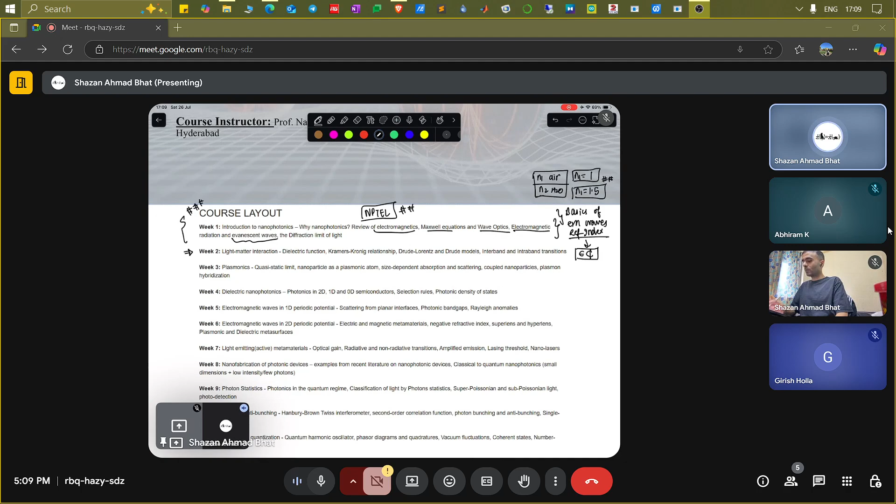That's what is going to be covered in week one. The professor has tried his best to cover those concepts in week one. We will try to brush up on it here in this session.

In week two, we will be dealing mostly with light-matter interaction. What is this light-matter interaction? It's basically the fundamental reason of what happens at the atomic scale, but this is just the classical interpretation, or what you call semi-classical. Semi-classical means you are treating the photons as electromagnetic waves, but treating the entire material as a group of atoms. That is what semi-classical basically means.

Let's give an example of what week two will deal with: the light-matter interaction part. You will come to know what happens when, for example, this is a material, let's say crystalline silicon, with a well-arranged structure of atoms inside it. If you shine a light, say a laser or some other light source, onto the silicon, what happens at the atomic scale? That is covered in this light-matter interaction part.

Why do I say this is semi-classical? If you have incoming light and material with atoms inside it, and you treat the light as an electromagnetic wave and the atoms as atoms, that is a semi-classical model or theory. But if you treat the atoms as such while treating light as photons, and compute how the photon interacts with single atoms, that case is the quantum case.

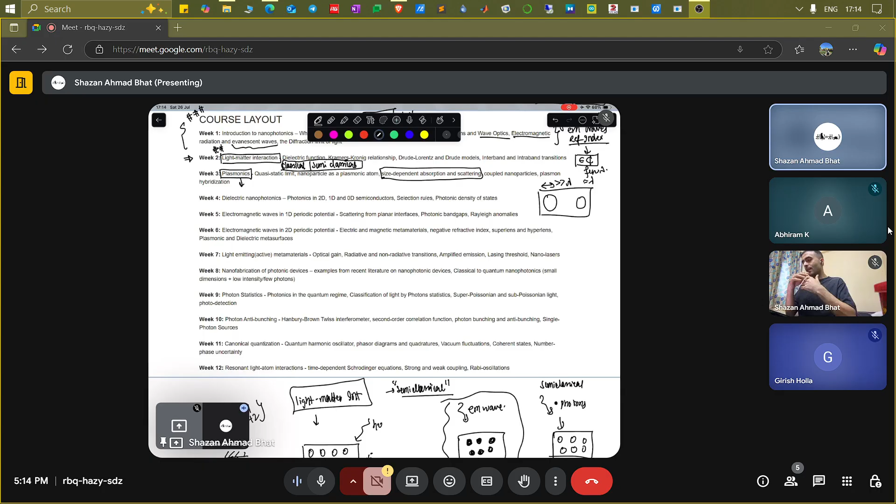Plasmonics is basically like collective excitation of the electrons. This is something called plasmons. For example, if you have a metal, you know that in a metal there are free electrons on the surface, a lot of free electrons. That's why it's highly conducting.

But what happens if you just shine light over the metal? It turns out that at a certain frequency, it's just like the resonance phenomena you have studied - the light resonates with the free electrons present on the metal. At that certain frequency, all these electrons in the metal couple to the light in such a way that it behaves like a single wave getting modulated inside the metal, like a wave in the metal. That is called collective excitation of electrons, also called plasma or plasmons - these are just fancy names, you don't need to worry about them.

Starting from earlier, we know about fermions and bosons. What is included in fermions? Electron is a fermion - particles having half integer spin. You don't need to worry about these things; if you know it that's fine, but if you don't know fermion or boson, that's absolutely fine too. But at least you know about electron, you know about photon - photon is a boson. And you have photon, phonon, and other bosons. These are something called quasi particles.

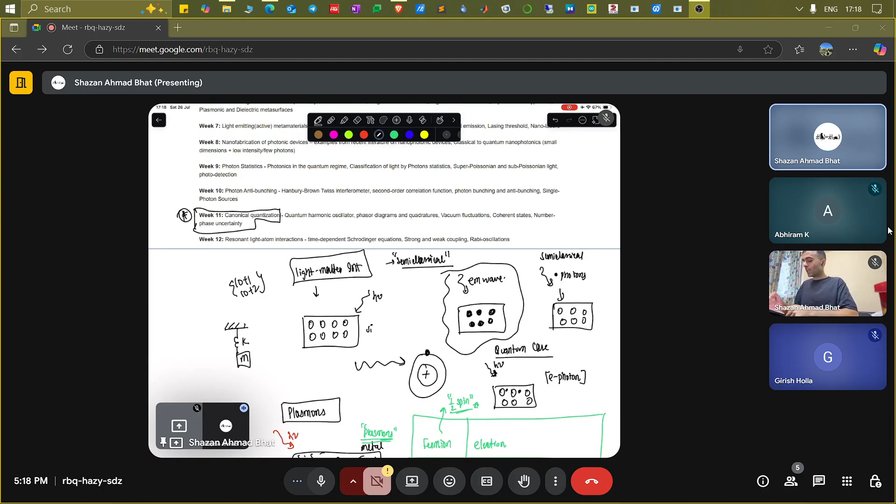In the final session of this, in week 11, you are going to study canonical quantization. If you have a continuous electromagnetic wave, for example this is the electric field, this is the magnetic field, the H field, and this is the direction of propagation of the wave. So what happens is if you quantize this thing, how do you quantize?

That's a different story. It's not just like you have a continuous signal and you take some discretized units and you get a discretized form of the wave. It's not as simple as that. Maybe you can understand it in that fashion, but it's not what exactly quantization means. If you quantize it, you get a particle picture, which is basically a photon.

So this is something called second quantization. The similar thing happens if you deal with any of the continuous fields. You have the electromagnetic field, which basically transmits electromagnetic energy.

You have, for example, the acoustic field. Acoustic field is like the acoustic wave. For example, I'm talking right now, so I am just vibrating the atoms in the air. But it's a continuous medium, the air is filled with molecules, filled with atoms, so it's a continuous medium filled with certain atoms.

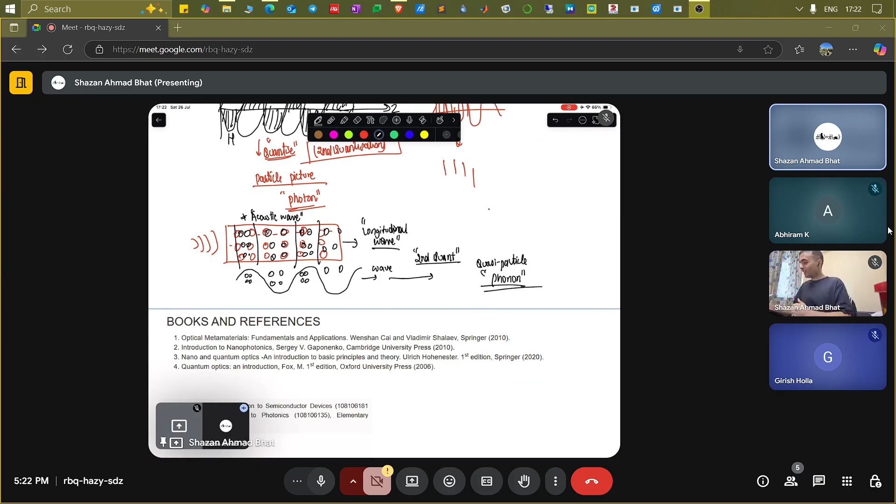And there are a lot of other quasi particles with names ending in 'on' - just like photon, phonon, maybe plasmon, magnon, polariton, and maybe polaron, all sorts of other stuff. You can just Google and you will find other quasi particles there. But what are these, basically? These are continuous fields, fields which are propagating energies between two interacting actual particles. When I talk about particles, I mean things like electrons, protons, neutrons - these are the actual particles. But these other things are the fields.

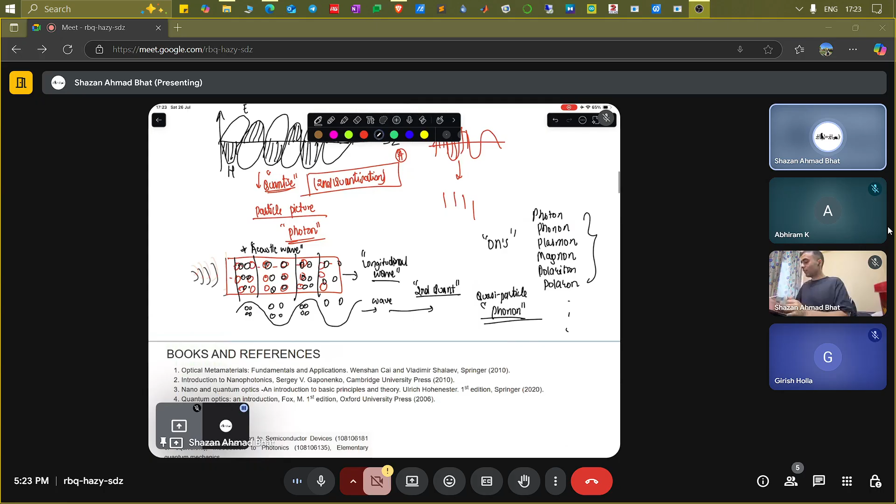That is a similar notion in, for example, if you talk about a magnon. What is a magnon? Maybe you might get worried about these names, but these are just fancy names. The concept can be simplified in terms of basic entities you know. Just like the photon is the quantized version of the electromagnetic wave.

The phonon is the quantized version of the acoustic wave, and phonons are present inside semiconductors because atoms can vibrate. If you quantize that vibration, you get a phonon. Similarly, plasmon: if you have continuous oscillations of the free electrons in a metal, that continuous free oscillation can be quantized using second quantization and you get a plasmon.

Similarly, magnons arise if you have certain magnetic materials, say a ferromagnetic material. The specific property of these materials is that they have domains where the spins have certain alignment. This is related to the spin of the electron, which can be either up-spin or down-spin. So what is spin?

We don't want to go into the philosophical or theoretical aspect of it, we just know about the spin of the electron. There are certain domains inside this ferromagnetic system where, say, all the spins are up-spin.

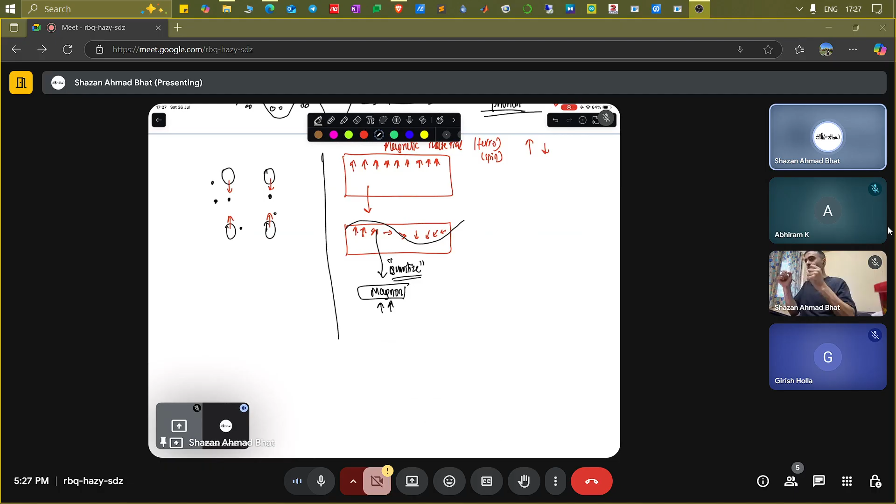When I say couple, I mean, for example, if you have a system with an atom and electrons here, you know atoms can vibrate. If this atom comes closer to another atom, what happens to the energies of the electron? They are going to change, because the electron's energy also depends on how close or how far the atoms are.

And where does this picture come from? It comes from your basic semiconductor physics, where we are always taught about crystalline systems with long range order of atoms. For example, in a semiconducting material the atoms are arranged in a well-ordered fashion.

Now if you take one atom, you know it has a positive nucleus surrounded by electrons, classically. Electrostatically, you have a positive charge and an electron, and you know how to draw the potential energy profile for such a system.

If you have a positive charge and an electron coming towards it, your potential energy profile will look something like this, plotted as potential energy versus x. So this is the potential energy profile of a single atom.

Let's consider, for example, a hydrogen atom - how does the potential energy profile look like if you have a single positive charge and an electron coming from infinity? As per the definition of potential energy, you will have a potential energy profile something like this.

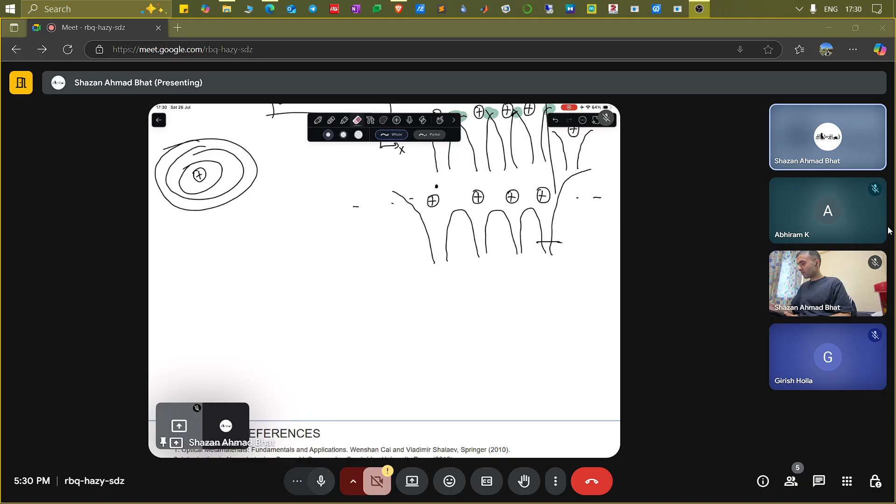Now what happens in semiconductor physics - let me just drop this. So if we talk about this potential energy profile, how do we get energy levels out of it? That means the orbits where the electrons are going to stay - these are just potential energy profiles.

Now what we do is we basically solve the Schrodinger equation. All of you know about the Schrodinger equation - this is the Schrodinger equation, let's say in one dimension, plus some potential energy, wave function equals E psi. This is the time independent Schrodinger equation. What do we need?

Don't worry about the fancy name, the Schrodinger equation - it's just a partial differential equation. What you need to solve it is this potential, V. If you know this potential as well as the energy, you can put it inside and solve the differential equation for psi, the wave function of the electron. This V, the potential, you get from these potential energy profiles. For an electron, the potential energy is basically Q times the potential - the electronic charge times the potential. Don't get confused with it.

What you do is take these potential energy profiles for the electron in an atom and approximate them as, for example, square potentials, because you don't want to deal with these curves - they're mathematically difficult to solve. You can solve them numerically, but there are challenges with these particular curvatures, because they're just like x-squared terms. So you simplify this potential profile and treat it as if these are just like wells - rectangular potential wells.

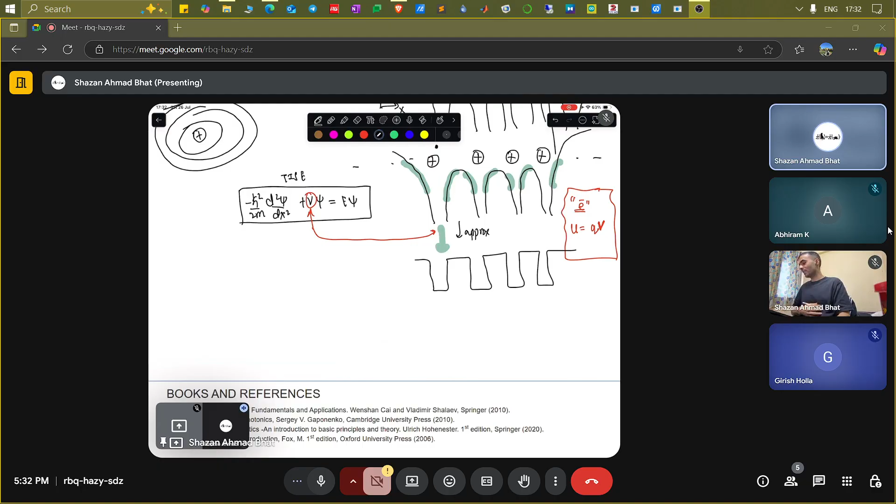You approximate it, and now you have the rectangular potential well. The distance between the two atoms you represent as, let's call it, lattice constant A. If this point is 0, if this point is A, let's call this point B, then this particular arrangement is going to repeat with this particular period, A plus B. So there will be repetition of it.

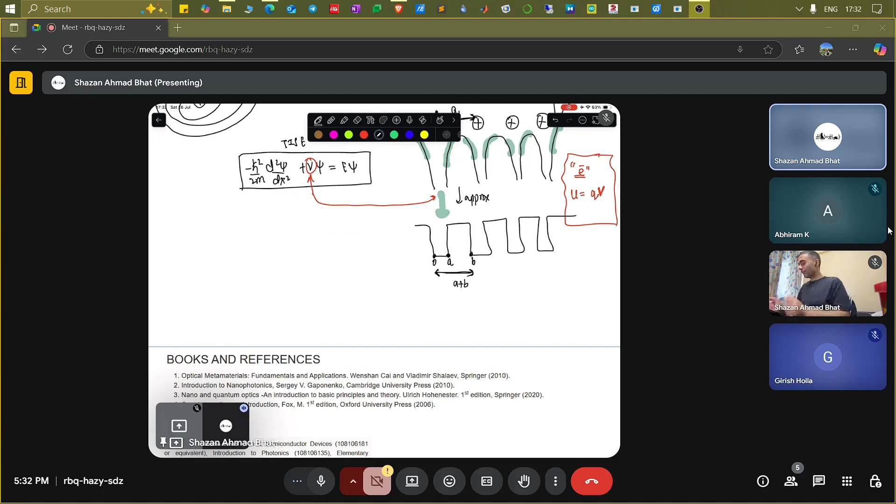Now what you do is take one of the wells, consider the electron to be here, and solve the Schrodinger equation for it, putting the V value as some constant value. Now when you solve the Schrodinger equation, what do you get? You get interesting things - you get a wave function of the electrons.

You can also get the energy because this is just like an eigenvalue problem, where h is basically the Hamiltonian: equals minus h bar squared over 2m, d squared by dx squared, plus the potential. This is the entire Hamiltonian, the kinetic energy part and the potential energy part.

The wave function psi is a function. This energy E is basically the eigenvalue, most of the times a real number. It gives you the energy value inside the system. And psi is again a wave function. So you solve this eigenvalue problem and you get the energy.

You get energy in terms of certain things. For example, if you want to solve this particular equation, you get the wave function first as a function of x, because it's a time independent Schrodinger equation. Now, you don't exactly solve it this way - I'm just trying to give you a brief overview.

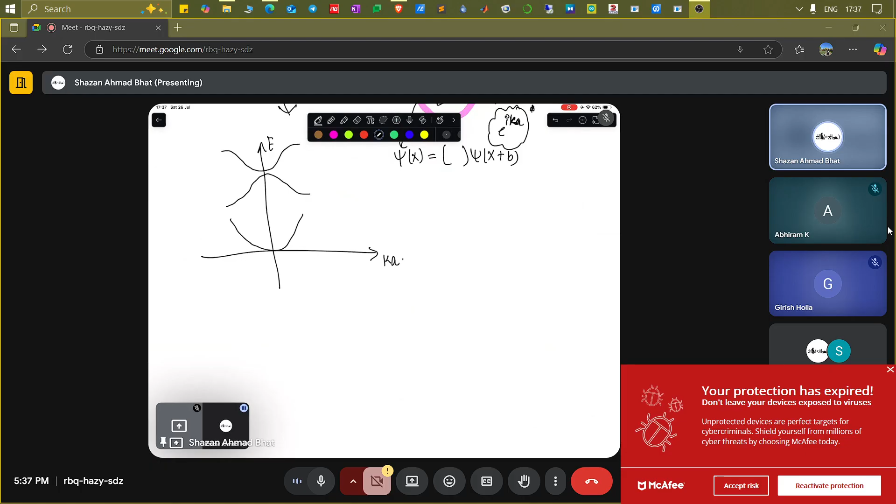These are just like the dispersion curves of the electrons. That means if you treat electrons as a wave, there will be different values of the wave function, which is basically a wave - just like, for example, if you have an electron's wave function, let's represent it as some sine wave, sine of kx with some constant here. It doesn't matter.

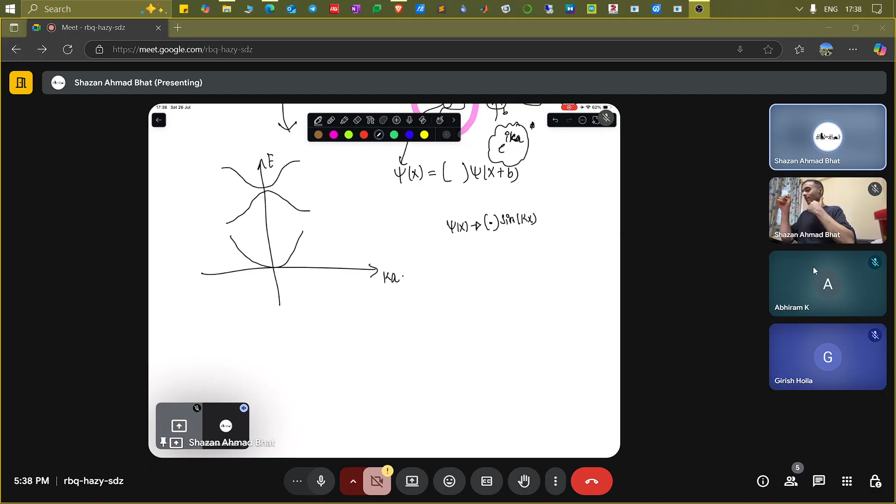So what happens is that now you're treating the electrons as a wave, so you have to deal with dispersion of those waves inside the lattice. And why I brought this particular concept here is because that is the same thing that happens with electromagnetic waves. So what does dispersion basically mean?

It is just like if you have a system, if you have atoms, and you just shine some waves over it, any wave, for example electrons, over all of the sides. What you will see is that not all of the energies of the electrons are going to be accepted. That is basically a system dependent thing. If you change the lattice altogether, the electrons' energy levels will change, meaning there will be a change in this dispersion figure of the electrons. I'm talking about the electrons.

So that is basically the notion of dispersion. If you have a certain system and you give in certain waves coming in altogether, the system will not accept all of the waves. It will have certain values where the electron's energy is not acceptable, and those values are basically called the band gap. That is the notion of the band gap, and it comes from the wave picture.

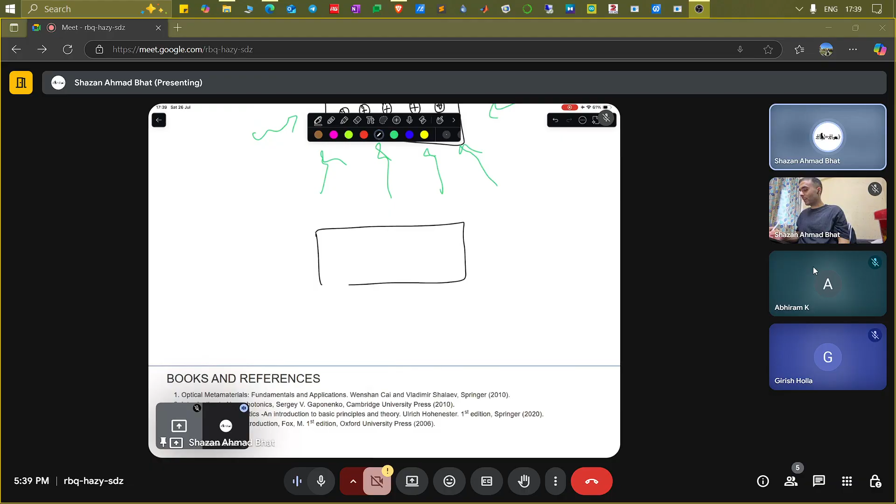And there will be certain values which will be acceptable, shown as these black curves, acceptable values of the electrons. That happens similarly in the case of an electromagnetic wave coming in. For example, if you have atoms and you shine an electromagnetic wave onto this system, the system is not going to accept all of the frequencies. Frequency means energy, because E equals h times nu.

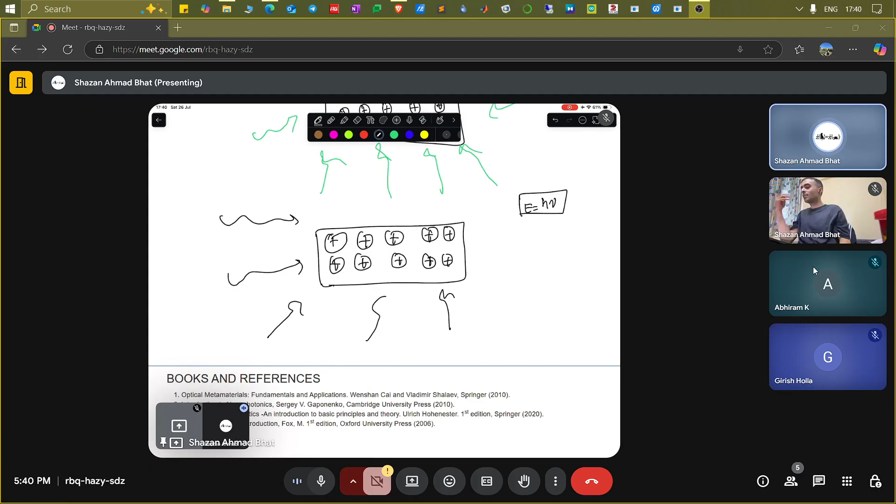So it's not going to accept all of the frequencies. There will be certain frequencies which won't be accepted by this particular system, because of this arrangement. I'm just talking about the arrangement—what happens at a deeper level is a different story. So that gives rise to certain acceptable values and certain unacceptable values. In terms of the electrons, these are called band gaps.

There is another thing called the photonic band gap. If you shine the electromagnetic wave, or the photons, over this particular system, it's not going to accept all of the frequencies. Some of the frequencies will be rejected. That will give rise to a gap, representing that this particular electromagnetic wave is not being accepted by the system. That is called the photonic band gap, as opposed to the electronic band gap.

Now, if you talk about Maxwell's equations, directly from what a professor might have taught in the course—you know the four Maxwell's equations, representing Gauss's law, Faraday's law, Ampere's circuital law—you can basically combine two of these Maxwell's equations into a single equation in terms of the time dependent part as well as the spatial part.

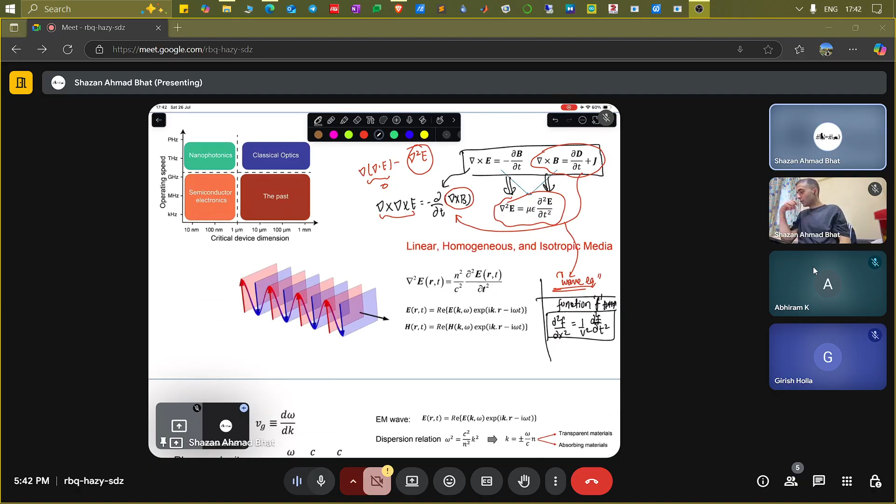Just a simple two-step problem. This equation is a wave equation. You have been dealing with wave equations from the starting. It's just like if you have a function f, you can write a wave equation like d squared f over dx squared in one dimension, equivalent to some velocity of that wave times the function's temporal change, a double differential. So this is the wave equation, which directly comes from Maxwell's equations.

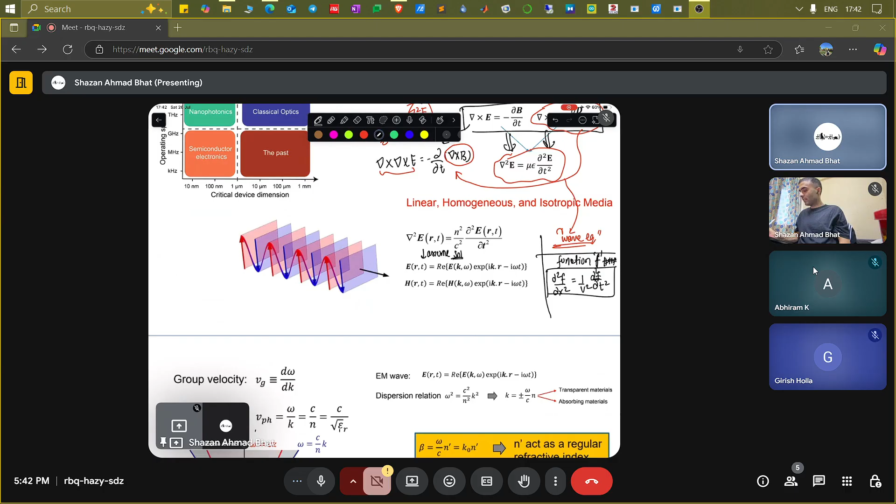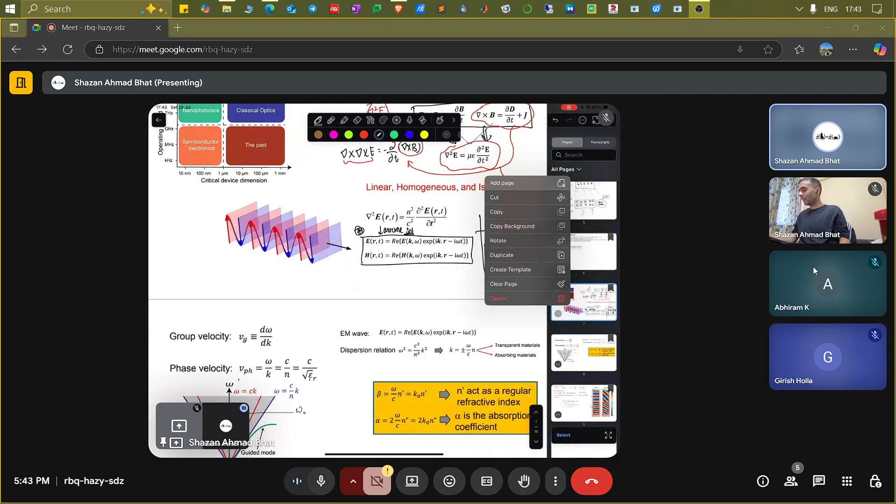Now, how do you solve this particular wave equation? You assume certain solutions, let's say e to the power of some exponential of i(kr minus omega t), as the solution, and you put it back into this equation and solve for it, and you get the electric field and the magnetic field. Once you get these, they are basically the oscillating parts, and they represent the electric component and the magnetic field component of the electromagnetic wave propagating in free space. We are right now talking about free space, so these are the electromagnetic waves.

This is the H field, the underlined one is the H field, and this is the electric field. These are mutually perpendicular to each other, and they are perpendicular to the direction of propagation, which is the z direction. So E is perpendicular to H, and both of them are perpendicular to the direction of propagation, which is z. That's why these are called transverse electromagnetic waves.

Transverse means they are perpendicular to each other, and they are perpendicular to the direction of propagation of the wave. Later on in this course you will see there are things called transverse electric and transverse magnetic modes. These are again understood by the same analogy.

In the transverse electric component, the electric field is perpendicular to the direction of propagation, and the magnetic field component is in the same direction - this is transverse electric. The transverse magnetic is when the magnetic field component is perpendicular to the direction of propagation, and the electric field component is parallel to the direction of propagation. So these are transverse electric and transverse magnetic modes.

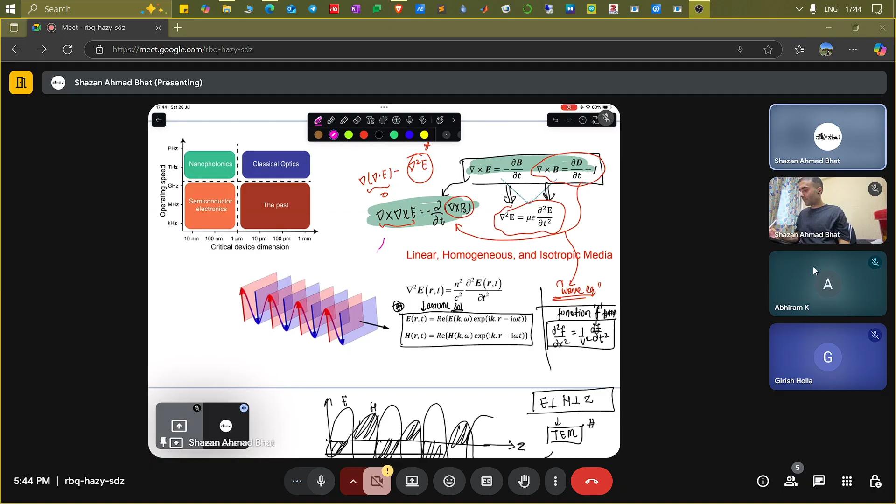So these modes are nothing but the solutions of Maxwell's equation in different systems. Just like if you have this differential equation, you solve it for free space, where there are no free charges and no polarizations coming into picture. When you solve it for free space, you get these plane wave solutions as a transverse electromagnetic wave.

But if you consider this same Maxwell equation in a system called a waveguide - a waveguide is just something which guides the wave, as simple as that - if you consider a waveguide, for example...

Let's consider this as some material, let's say silicon, and this is like a silicon bar, let's call this a substrate. And if you have certain other material over here, you don't know this material, let's call it material A. What will happen is that if electromagnetic wave somehow comes in and hits this particular side, you will see that most of the electromagnetic wave will go through this particular system, but it won't go through as the wave it was in free space.

Let's say in free space it was a transverse electromagnetic wave coming in. But once it goes into the system, it has a different acceptable solution coming from Maxwell's equation, and that is not necessarily a TEM mode. It can be a transverse electric mode, or a transverse magnetic mode. So those modes are basically the solutions of Maxwell's equation in this particular system - that is the simplest notion of what a mode is.

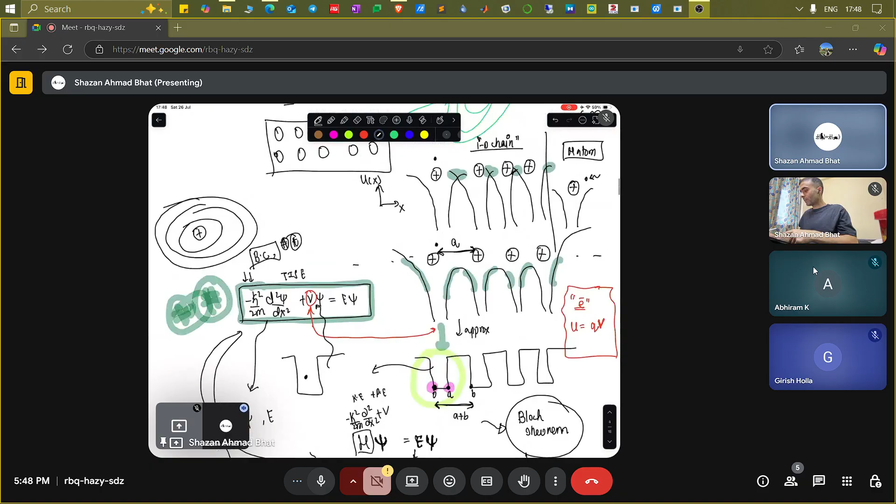Why does that happen? Because now it has encountered a different refractive index altogether. It's just like if you consider, for example, an electron - if this is a well, it's something called a quantum well. It is the same well I talked about with the atoms, the atomic potential energy profile, which got converted to square potential wells. If you talk about one of the wells and solve the Schrodinger equation for it, you get the energy levels as discretized.

Okay, you get discrete energy values, E1, E2, E3, and so on. So what are these energy values for? These are for electrons. Let's say, for example, if you have earlier a free electron, it can have continuous values of energies.

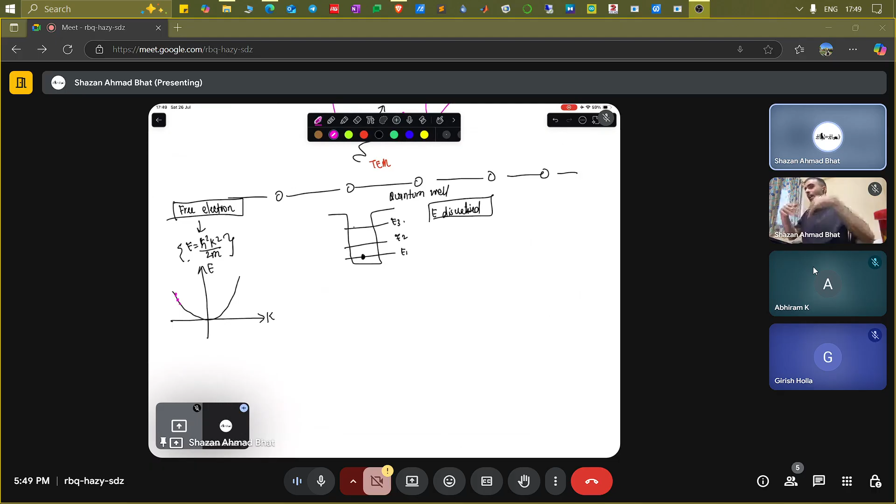For that, the energy is basically h bar square k square divided by 2m. This is just like the energy of a free electron propagating in free space. It has continuous values of energies. If you draw E versus K, where K is the wave vector, you have a parabolic relationship, and it can assume all of these values. The electron can have any value falling on this particular parabola.

But if you move this free electron into a confined structure, let's say an atom, because of confinement, when you solve the Schrodinger equation, it gives you a solution with discretized energies. The energy no longer is continuous. Earlier you used to have continuous energy, now you have discretized energies.

This particular plot is E versus X, a space plot. If you draw it in terms of E versus K, you have energy levels like this, and each value is now a discretized value.

And also the band gap opens up because now you've put the electron in a system with many atoms. The reason for the band gap opening is the same as the dispersion of the electron as a wave - some of the values are acceptable by the system and some of the frequency or energy values are unacceptable by the system. It opens up a band gap.

Now when you solve the Schrodinger equation, you get energy levels for the electrons. For example, for n equals to 1, the wave function psi 1 looks something like square root of 2 by L sine of kx. This is the solution of the Schrodinger equation.

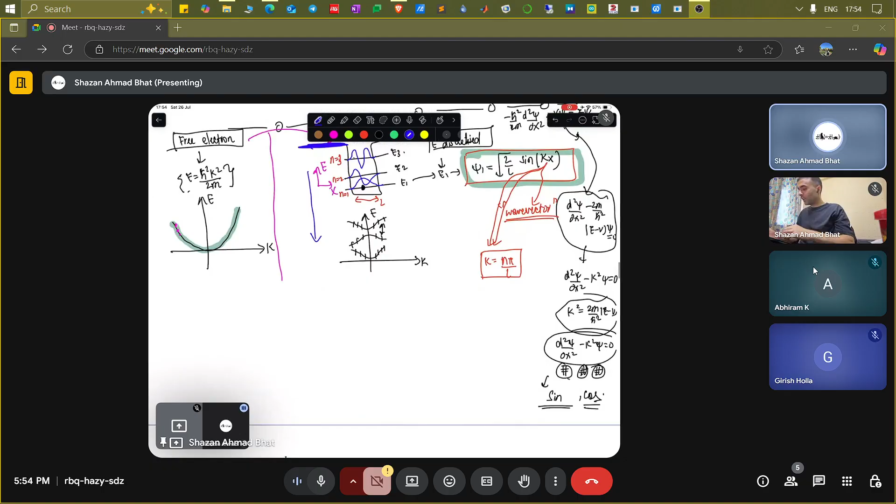Now that was for the infinite well problem. If you have a finite well, you solve the same Schrodinger equation with appropriate boundary conditions, and you get a solution that looks like this. It is similar, except for one important difference.

That difference is basically this particular decaying part, on both sides. That means if this is the quantum well of length L, you wouldn't expect the electron outside the well since it's a trapped system. But what the solution of the Schrodinger equation tells you is that there will be some e to the power minus alpha x terms on both sides, which is very strange.

That means the electron's wave function was just like this earlier—completely inside the well.

The wave function, psi of x, basically gives you the probability. If you mod square it, this is the probability density function, and it tells you what is the probability of finding the electron.

So earlier it was fully inside the well, but now because you are considering the finite potential, what has happened is that you have these leaking parts of the wave function. These are leaking, and these are basically something called evanescent modes.

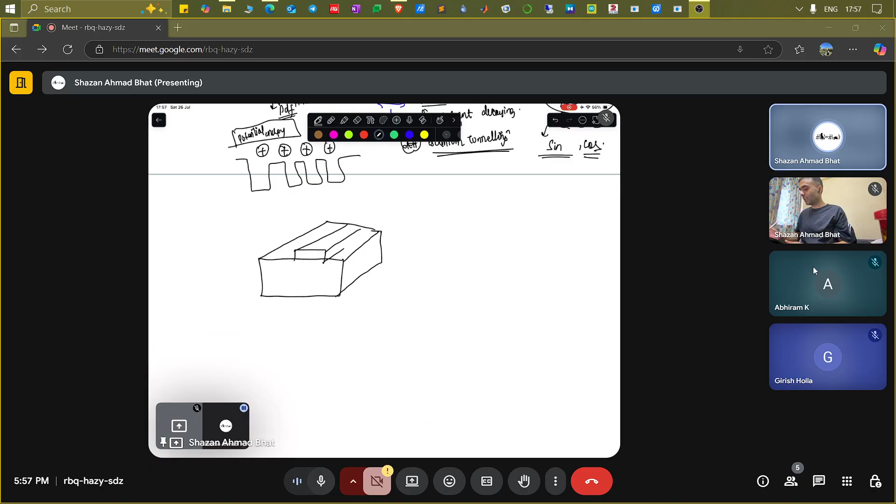Now, it turns out if you have a similar system wherein you have a variation in the refractive index instead of potential energy—let's say, for example, this is some substrate, and there is another material present with a different refractive index, N2, and this is N1, where N2 is greater than N1. If you draw the refractive index as a function of x, it will look something like this.

This will be the refractive index profile with respect to x, the spatial refractive index profile. It will not be exactly square, more like somewhat rounded, but let's consider it as a square. Now you have to do the same exercise, but consider a photon or electromagnetic wave instead—let's talk about electromagnetic waves here.

And you have to solve a wave equation—but not the Schrodinger wave equation. You solve Maxwell's wave equation instead, because the electromagnetic wave is a classical thing. You solve Maxwell's equation again.

When you solve the Maxwell's equations, you get solutions as sine or cosine, depending upon the boundary conditions you use. It turns out if you solve it using particular boundary conditions, you arrive at solutions which can be either transverse electric or transverse magnetic.

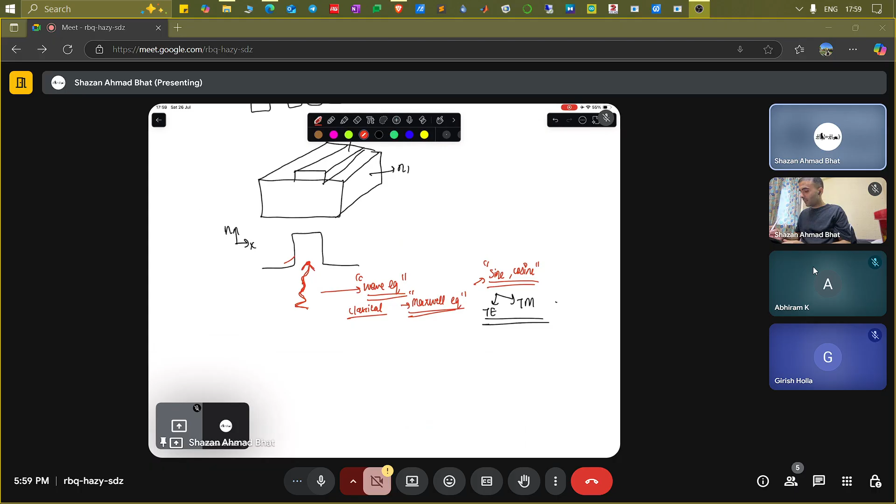The profile or mode solution will look exactly similar. If you talk about TE10 mode, these are just like indexes, don't worry about them. What I'm trying to say is you'll get a similar profile of the electromagnetic wave propagating through this system. It will look like this. This will be the first TE mode, just like the first solution of the wave function for n equals to 1.

Similarly, if you go on to higher modes, you can have a solution of Maxwell's equation which may look something like this, bimodal. So there is a resemblance because the governing equations are similar - these are the partial differential equations you are trying to solve.

What I'm trying to say here is that the electromagnetic wave moves just like a Gaussian packet inside this entire waveguide, in the form of a transverse electric mode. That's how it propagates, in this direction. If you have an electromagnetic wave coming in, because of Maxwell's equation it has a different acceptable solution inside the system. Solving the Maxwell equation considering the boundary condition, you get a TE mode which can propagate inside this waveguide in this particular direction - this is the first TE mode.

Similarly, if you go into higher modes, this is the second mode, higher mode, this is the third mode. You see there is a weird resemblance with electrons in a potential well. It also has a similar solution, except that here it represents psi, the wave function of the electron, which gives the probability of finding an electron. But here, the solution of the Maxwell's wave equation gives you the electric field amplitude.

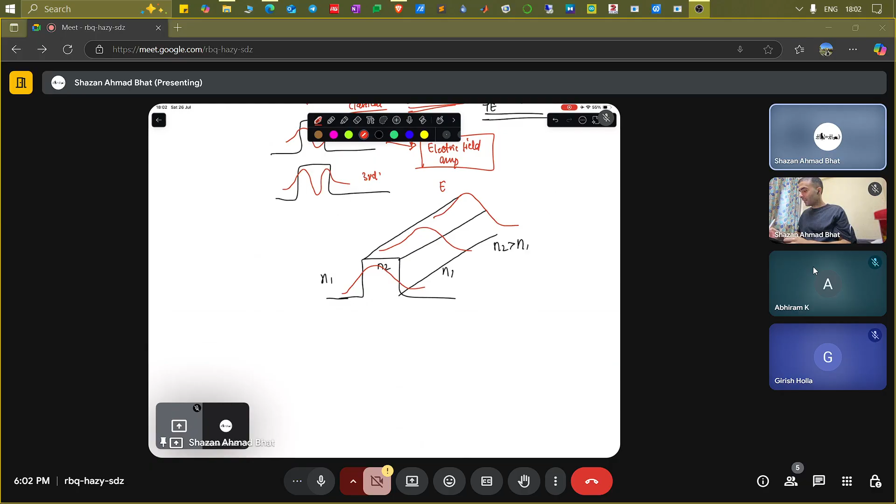Now the interesting part - you had the refractive index gradient. This is N1 refractive index, this is N1, this is N2, and N2 is greater than N1. So when you solve Maxwell's equation for this particular part, you have the mode propagating like this in this direction. Now the interesting part is that there are also these leaking parts, leaking from this higher refractive index region towards the lower refractive index part.

So this is the evanescent part also. It's just like the electric field component is not exactly terminating at these edges. But there is a finite chance that this electromagnetic wave can leak from this waveguide and go into the surroundings. Although the leaking part is very small, it is always there. This is the evanescent part, or you can think of it like a tunneling of the electromagnetic wave - but this is a very classical phenomena.

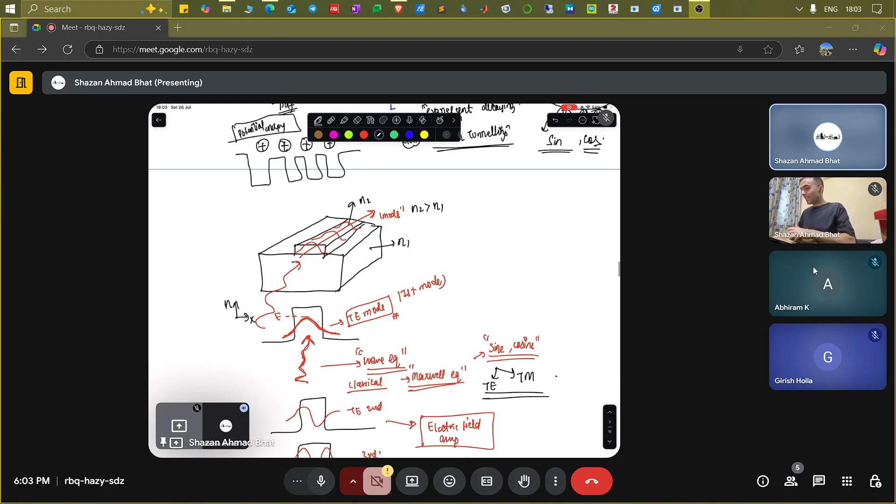But here, in terms of electrons, this tunneling is purely a quantum phenomena. So you see where the analogy is and where you can basically correlate these two things, because these are similar since the nature of the equations are similar. You are solving partial differential equations and getting similar sets of solutions. But the Schrodinger equation gives you the probability density, or probability distribution function, which is psi or mod square psi.

And this particular thing gives you the electromagnetic field, electric field amplitude. So that is the notion of this particular thing, where you can basically understand the evanescent part and the tunneling part in the electrons, and the evanescent part in the electromagnetic waves.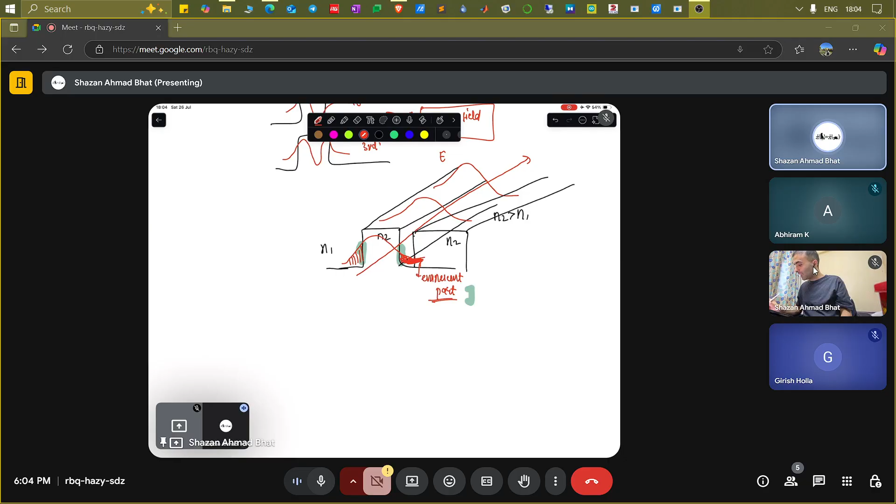Now if you bring some other structure very close to this evanescent part, if you have another waveguide here with, let's say, another refractive index of N2, what can happen is that this decaying evanescent part can now propagate in this waveguide. Earlier you had a very small leaking part, but if you bring another waveguide very close to this leaking part, at a very small distance you can compute it mathematically.

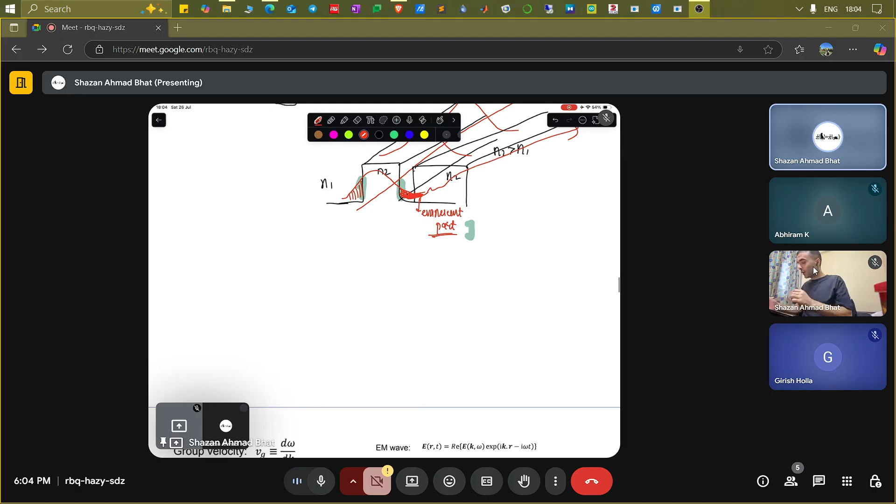What will happen is that this leaking part will become a propagating wave inside the waveguide. It is just like, let me give you an example in terms of electrons, maybe you can relate it with that of electrons. Let's say, for example, if you just deposit layer by layer certain materials, let's call it material A, material B, A, B, A, B, such that for material A the band gap is greater, and for material B the band gap is lower.

So when you draw the band diagram for it, which is energy versus space X, it will look like something like this.

So what I'm drawing is this is the conduction band for material B, this is the conduction band for material A, this is the valence band for material B, and this is the valence band for material A. So these are different materials stacked layer by layer with different band gaps, such that for material B the band gap is this, for material A the band gap is this. This is EGA and this is EGB, and you can clearly see that EGA is greater than EGB.

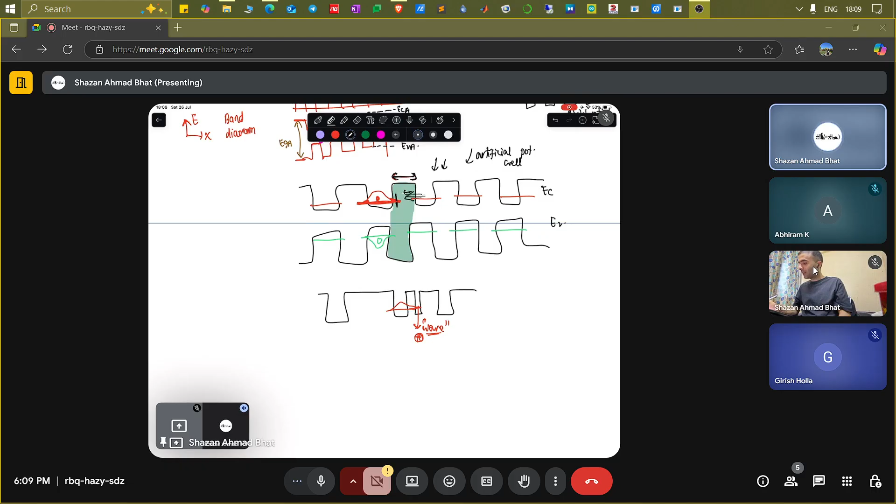But the ambiguity is that this is the band gap of some material, and in the band gap the electron is not supposed to be there, but it is coming in there because of the evanescent decaying part, because of tunneling. Now if you bring this system closer by making the thickness thin, you can couple the evanescent decaying part into this, and now the electron will have its own energy level inside the system. Similarly, if you have a potential energy barrier like this, this is the potential energy barrier.

That means if you have a potential energy barrier, let's say there is some negative charge. Negative charge is going to have an opposite potential energy profile. What it means is that if an electron wants to come closer to the negative charge, it will face repulsion, so it will be difficult for the electron to come closer. That is basically the potential energy profile shown for this.

Similarly, for the positive charge, it was opposite. Electron wants to come to the positive, so the potential profile looks like this. It is almost like attracting. But for the negative, it's repelling. There's a barrier because of this negative charge.

So now, for example, the electron here is in, let's say, free space. This is some medium because of which there is some potential barrier present here. It is the barrier for the electron.

Now, in free space, the electron behaves as a plane wave, just like an electromagnetic wave. The solution is like a plane wave, something like sine kx, where k is continuous, not discretized. Or you can write it as e to the power of i(omega*t minus kx). This is the solution of the electrons in free space when you solve for it.

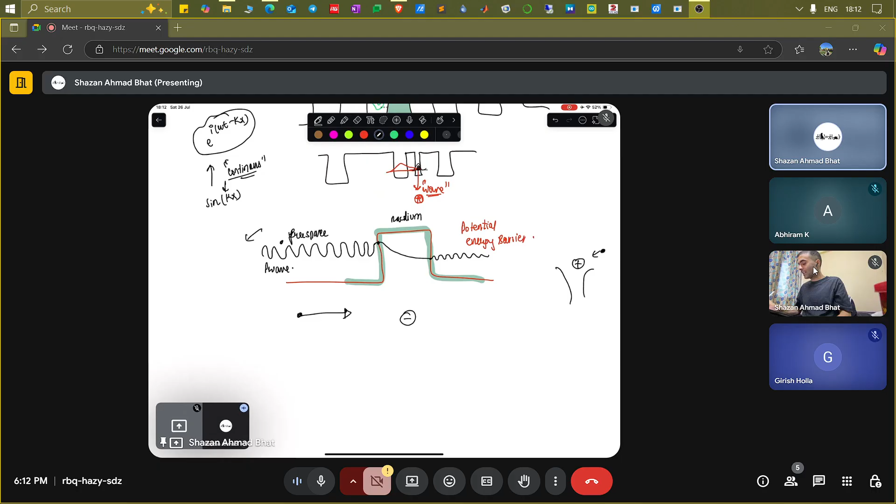And once it decays, if it has enough remaining probability to get to the other side, it will appear as an oscillating part again, as a free wave. So this is free space here, and this is again free space. It's just like electrons behaving like a free particle here.

It can be free space, or it can be something like a metal where the electrons behave freely without any influence of the atoms, something called the free electron model. Now the interesting part is that the electron was behaving like a plane wave outside — a free electron, which is a better term than free space. So this is like a free electron, for example in a metal.

It was behaving as a plane wave, but once it encountered some potential energy barrier, it will go on decaying inside it. What is decaying is this wave function. And if you square the wave function, you get the probability density, the probability distribution of that particular electron.

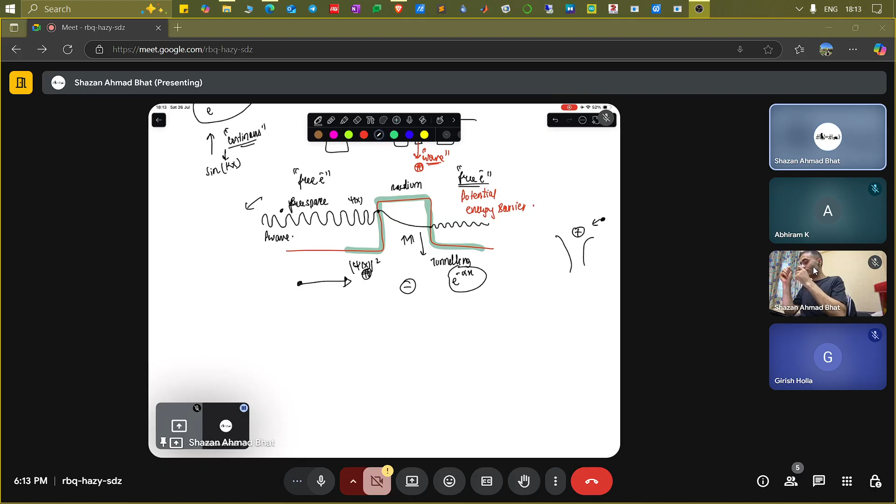Now the weird part is that the electron was not supposed to be inside, but now, because of this evanescent part, because of this tunneling, because of the decaying part, which looks something like e to the power minus alpha x, there is some finite probability of finding the electron inside this potential barrier. But outside, it again behaves like a plane wave.

Now, for example, if you make this — let's say the thickness of this barrier was earlier T1 — now if you make the barrier very thick, to T2, where T2 is much, much greater than T1, and you have a free electron coming in, it starts to decay, it decays completely inside, and you get nothing here.

That is the weird but essential part of quantum mechanics. It is just like the electron already knows that it's going to hit a barrier which is very thick or very thin. Because in one case, the electron tunnels and appears on the other side as a plane wave, but in another case, the electron tunnels but just vanishes. You get nothing on the other side.

And this can be controlled depending upon the thickness of these barriers. How do you control the thickness? By depositing different layers of materials, material A, material B, with different band gaps and different potential energy profiles. That is how you tune and control quantum tunneling.

That is the similar notion with what happens with light. This was for the wave function of electrons. If you have a similar thing for light, let's say you have a structure like this, where an electromagnetic wave is moving. Because whenever the electromagnetic wave is moving inside this waveguide, it will appear as some modes.

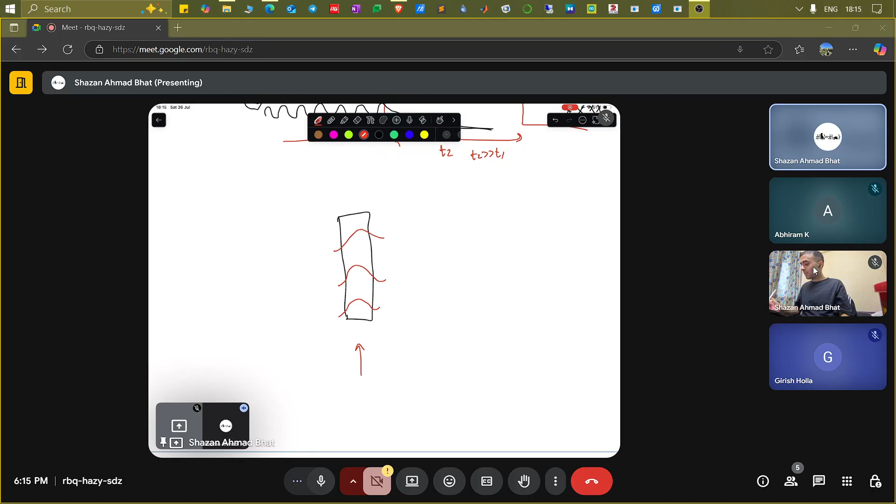Let's say these are TE modes, where you have a propagating part in this direction and you have these evanescent decaying parts in this direction. Now what is going to happen? Similar situation: if you bring something very close to this particular waveguide, you can utilize these evanescent waves.

And you can make them propagating. That is the weird part. They were the decaying parts, but you can make them propagating. These are just like the high frequency parts, but you can make them propagate in a different structure altogether.

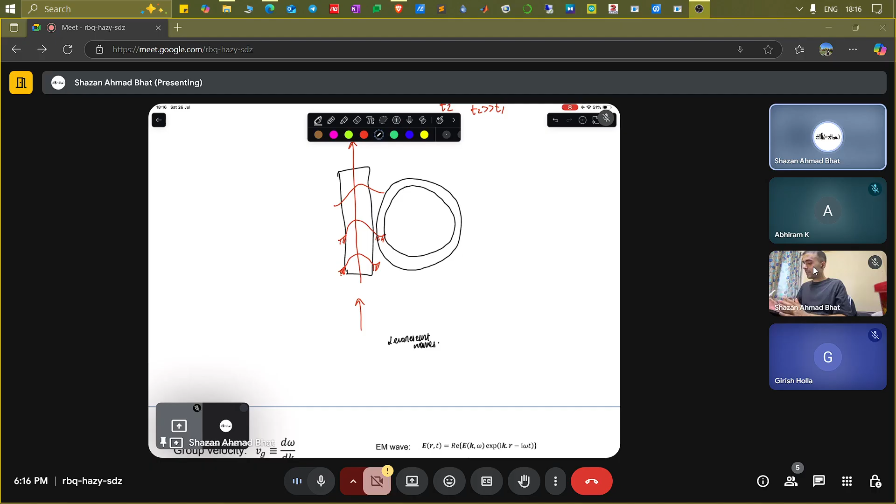Let's say, for example, if you bring in a waveguide, something like a circular thing. A waveguide can be of any shape, just like a circular medium that supports electromagnetic waves, certain modes, TE, TM. But if you bring it very close to this particular rectangular waveguide - this is rectangular, this is circular waveguide.

If you bring this waveguide very close to the rectangular one, and now you solve Maxwell's equations again at this particular point, you will see that the decaying part couples into the circular waveguide, and now it starts to propagate inside the circular waveguide. This is basically coupling of the evanescent wave into the circular waveguide.

That is what I mean to say, that you can utilize these evanescent decaying modes once you bring something very close to them, just like the electrons. If you make the potential barrier very thin, you can get electrons on the other side as a plane wave, just like a free electron. If the potential barrier is very thick, you will get nothing.

Similarly, if the circular waveguide is very close to the electromagnetic wave's evanescent part, you will get a propagating wave inside the circular waveguide. That basically comes from the acceptable solution of Maxwell's equations. You have to solve Maxwell's equations again at this particular point, and you will see you get certain acceptable modes in the circular waveguide.

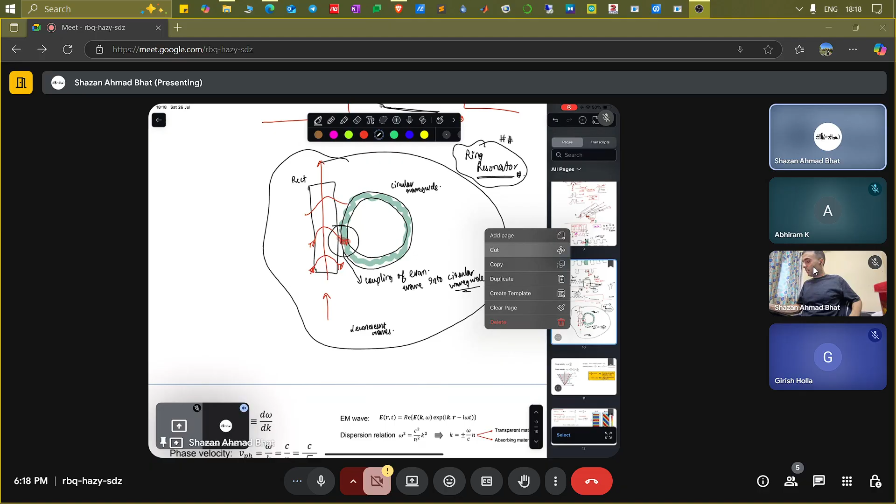Let's say, for example, you have a prism, a classical example we all know about. Light comes in, it undergoes bending, then there is another part here where it can go outside. So there is bending at these particular parts. This is the incident light coming in at the prism, and you have the refracted part inside, then the reflected part again inside, and then again the refracted part which goes outside.

Let's not consider the incident rays falling at a total internal reflection angle, let's say some theta. This is theta incident and this is theta refracted. Similarly, for this particular bottom part, this is theta incident, and this is theta reflected, r dash. What basically happens?

This evanescent decay concept applies here also. What happens basically is the electromagnetic wave comes, it hits, and now it undergoes bending - all of the things the professor has covered. There is a change in the wavelength. The frequency remains constant because frequency is a concept coming from the source; whatever the source is emitting, the wavelength changes.

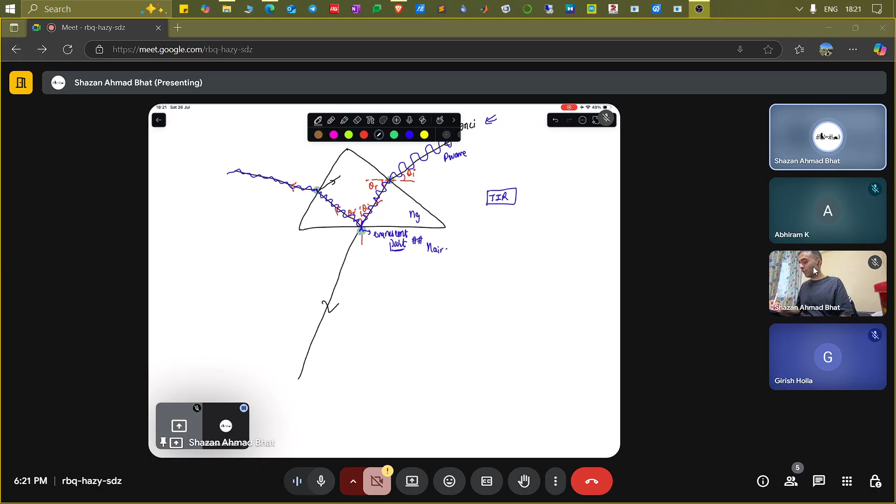This mostly happens at an angle, if you're talking about total internal reflection happening inside it. So whatever is feeding in gets internally reflected and comes back on the other side - that is the concept of total internal reflection. Otherwise, the electromagnetic wave can come outside on this particular side instead. But we're talking particularly about total internal reflection here.

Just like if you have an optical fiber, let's say this is cladding, and there is an internal structure which is basically the core. Optical fiber is also like a waveguide. If you put the laser at some particular angle equivalent to the total internal reflection of this light beam, it will undergo TIR inside, and you will see the light waves propagating inside the fiber.

But what happens at these particular points, at these edges where there are two different refractive indices, cladding and the core - here also the wave starts to leak. There is a leaking part, and this becomes very dominant when you have a long distance optical fiber. They contribute to a lot of losses.

That is the similar concept that happens in a prism. If you shine it at the angle for total internal reflection, you will see there's an evanescent part at this particular point, which is basically a leaking part.

The important thing to note here is that if you somehow bring another prism closer to it in the opposite orientation, you can see that this evanescent mode can basically couple to the other prism, and you will get a wave coming out from this - a propagating wave, because now it has got the medium to propagate based on the wave vectors, as you have studied in the lectures.

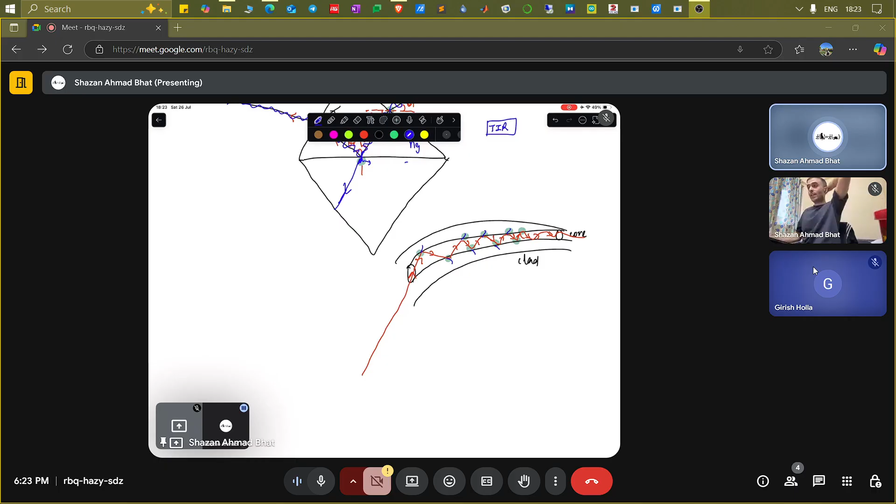So that is basically the notion of where you can use evanescent modes, evanescent decay, or these tunneling parts of the electromagnetic wave. These are all real life examples where they are used, particularly in case of optical fibers - you have a 10-kilometer or 50-kilometer optical fiber, and these evanescent decaying parts are always there.

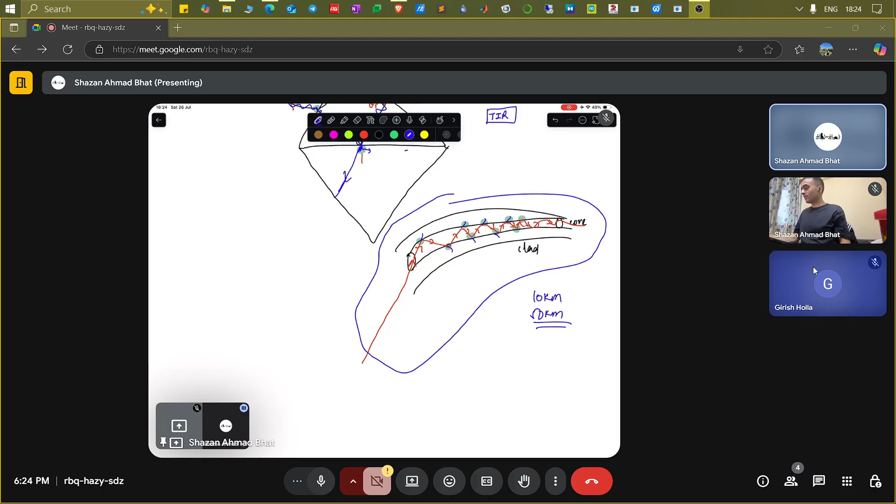They contribute to a lot of power loss, because whatever you are feeding in gets lost - some part gets absorbed, some gets decayed to the surrounding medium as a form of evanescent decaying part, contributing to different phenomena. These are some of the application parts, and how you can correlate these things to the wave function of the electron, the electric field - because for understanding the wave function of the electron, you have to solve the Schrodinger equation, and for the electric field you have to solve Maxwell's equation. But the governing equations are the same - they are partial differential equations with the same set of solutions, similar mathematical solutions. That is the essential part of it.

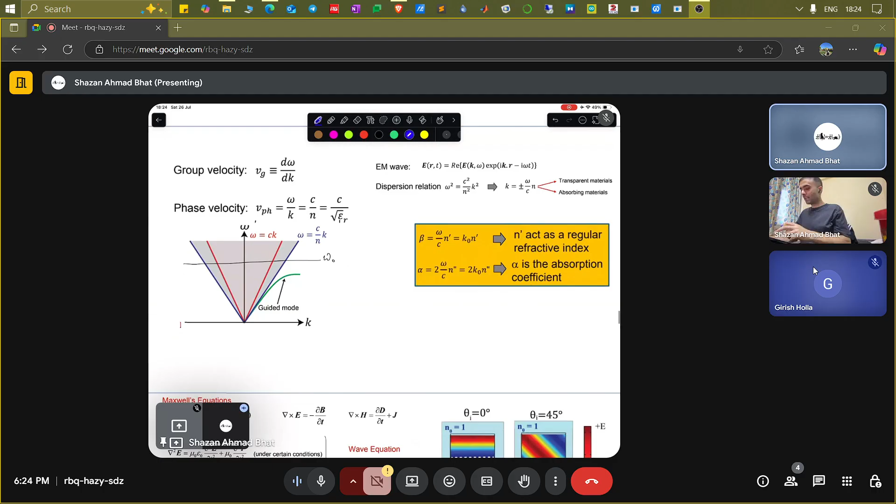Now that is it about this, and now we talk about - this part has been essentially covered, these are basically plane waves propagating through a certain structure. Let's say this is air, this is glass. Then you see the plane waves propagate - this is basically the top view of the air-glass slab. You see that the wavelength gets changed.

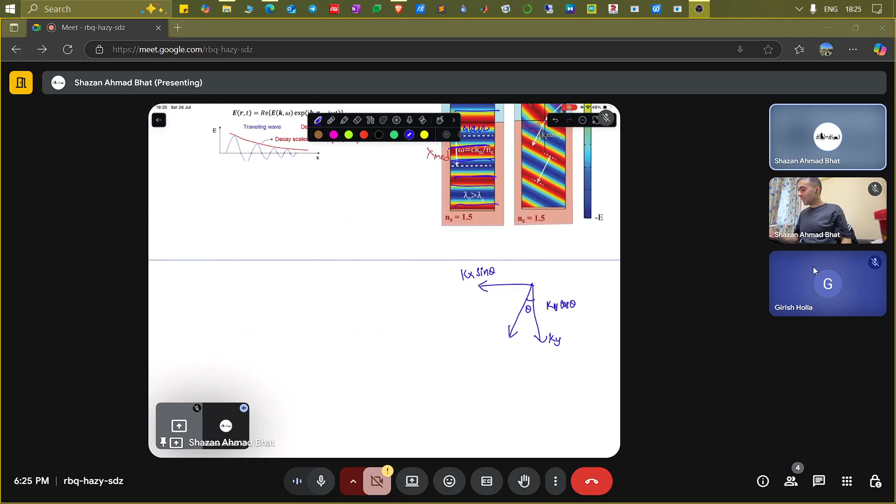Okay, but this is what happens at the oblique incidence. At oblique incidence, where the incidence is at a certain angle, you have to conserve things. For example, if you have the incidence like this, you can always distribute it into two components: one kx, one ky. If this is angle theta, you can write it as kx sine theta and ky cos theta. That means if an electromagnetic wave comes in at an angle, you can resolve it into two components.

Then, as per the boundary condition at this particular interface, this component and this component are going to be the same, because they are parallel components. So the parallel components are going to be equal, but the perpendicular components are not going to be equal, because at this point there is symmetry breaking. There are two different mediums altogether. So the parallel component will be the same, but the perpendicular component will not.

These are just like the boundary conditions of Maxwell's equations. There are four boundary conditions basically. There is electric field, there is magnetic field. There are two boundary conditions for the electric field, two boundary conditions for the magnetic field. One is the parallel component, another one is the perpendicular component.

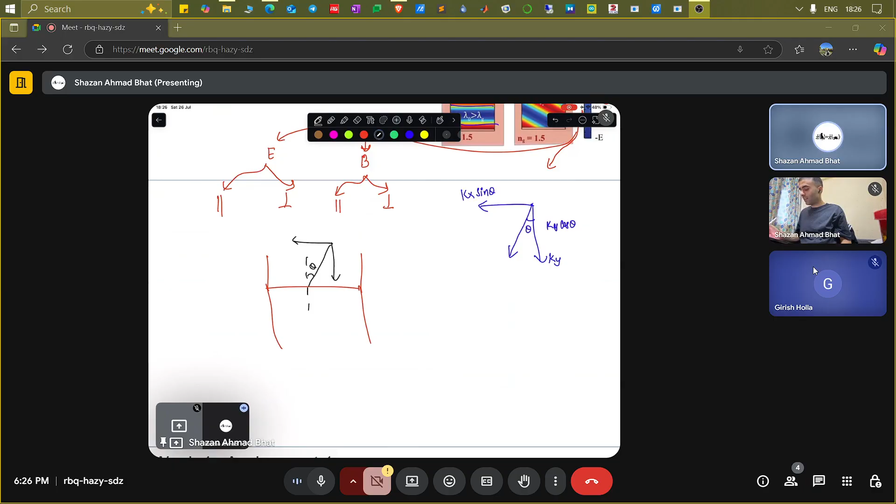So when you solve Maxwell's equations at any interface, let's say this is theta, and when you distribute it, this is kx sine theta, this is ky cos theta. You have to always think about conserving these parallel and perpendicular components of the electric field. Just like I told you, inside the medium, the kx components, the parallel components, will be the same, but that's not the case with the perpendicular components. So we are talking mostly about these electric field components here.

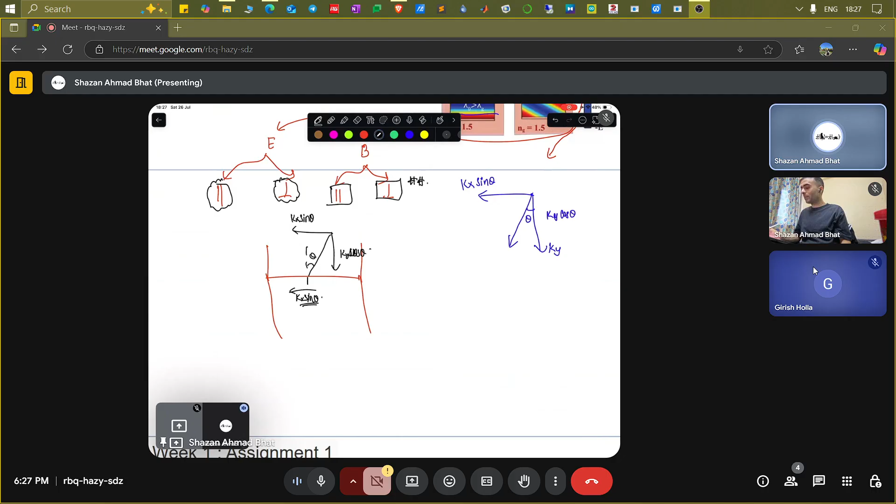Similarly, when you deal with materials of higher permeability, magnetic permeability, there you deal with the magnetic field components as well, the parallel and perpendicular components of the magnetic field. So that is basically the notion of oblique and normal incidence.

Now, what happens if we jump into what was covered in week one, and try to solve some problems from the week one assignment? So first of all, we have... give me a moment.

So first, we have to consider which of the following is true about the refractive index of an absorbing material when broadband light is incident on it. There are quite a number of terms here: refractive index, absorbing material, broadband light.

Broadband light means it has a broad spectrum, like white light. It's like white light consisting of many frequencies, starting from violet, indigo, and so on up to red. So just like a broadband light.

Absorbing material is something that has the capacity to absorb the electromagnetic wave. Now, what does it depend on? Can all materials absorb electromagnetic waves? The answer is no. It depends upon the refractive index.

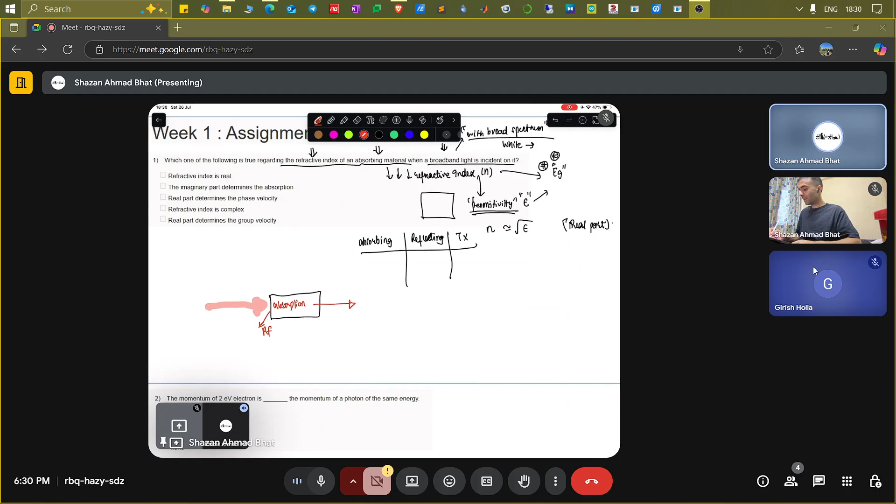Most of the time, all three things happen simultaneously. For example, if you have some material and shine light, let's say red light, in this direction, there will be some absorption inside the material, but some part of the red light will get transmitted, and some part will get reflected. So this is the reflecting part, this is the transmitting part, and this part will be absorbed inside the material. This absorption basically comes because of the complex refractive index.

Now the refractive index, we write it as n plus, let's say, i times k. This particular part basically tells you how much is the absorption of the refractive index.

How much is the absorption of the electromagnetic wave? It's the decaying, how much is it decaying inside the medium? For example, if you have a glass slab, or this is water, and an electromagnetic wave coming in, it will decay inside it. The amplitude will reduce, but it is still propagating inside it. So this is decaying amplitude.

It is not the evanescent mode, just make sure you understand that. I'm talking about an electromagnetic wave coming in, and the amplitude is decaying, and then it's coming out on the other side. These are propagating waves altogether.

Similarly, certain materials have a higher absorption coefficient. What is absorption coefficient? It is represented by alpha, and the units of alpha are 1 by meter, that is 1 by some unit of distance. If you inverse it, you get something called penetration depth, given by 1 by alpha, with units of meters. It tells you how much the electromagnetic wave can penetrate inside the medium. That is the notion of absorption coefficient.

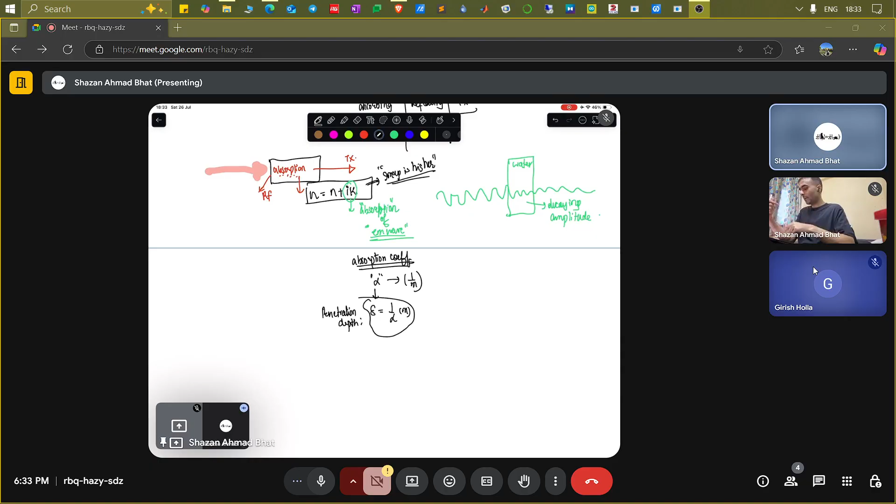So if you have a complex refractive index and the imaginary part is higher, that particular medium will be highly absorbing, meaning it will absorb a lot of electromagnetic wave and you will get very little transmission. On the other hand, if the imaginary part is lower, you get higher transmission through that medium and lower absorption. This absorption is responsible for heating because of light.

For example, if you have a certain material and shine a laser on it, it starts to heat up. Why? Because corresponding to, let's say, a wavelength of 1000 nanometers, this material has an absorption coefficient which is huge at 1000 nanometers. That means it is absorbing the 1000 nanometer wavelength, and that gives rise to heat.

You may ask about energy conservation - what happens? If energy is coming in and being absorbed by the medium, where is that energy going? It must take some other form of energy, which is converted into heat. That is how it gives rise to heating inside the medium because of the huge absorption coefficient.

Now, if you have a different material and shine the same 1000 nanometer laser - this was material A, let's say this is material B - and for material B, the absorption coefficient at 1000 nanometers is very low, alpha is low. You will see there won't be much heating at this place. The temperature rise will be very low because the absorption coefficient is low, meaning it absorbs very little electromagnetic energy.

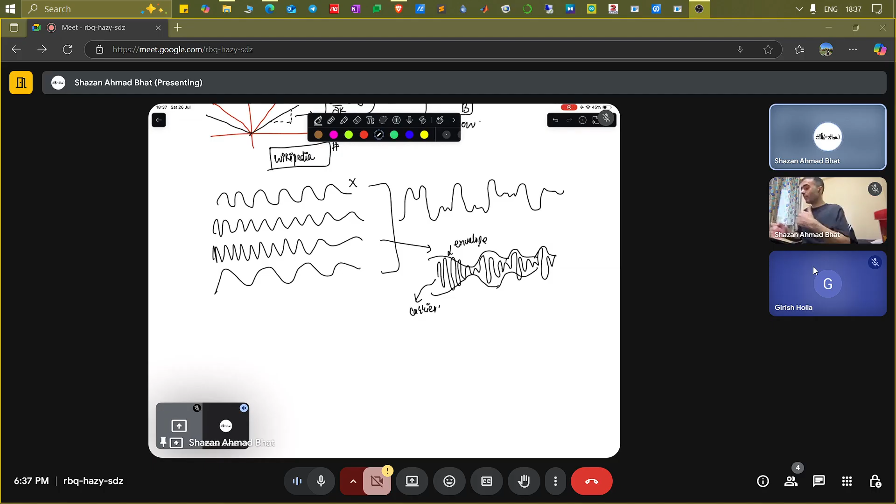And then you talk about, for example, you may get a wave something like this, where you see there is some slowly varying envelope part, which is the envelope, and there is some faster moving part, which is the carrier. In that case, you have to invoke this concept of group velocity and phase velocity.

So the phase velocity is how fast the phase changes, and the group velocity is how fast the wave is basically traveling. That is the exact velocity with which the information travels, with which the wave is exactly traveling. So this is the actual velocity.

That is why people are mostly confused about it, because it needs a great deal of visualization to understand group velocity and phase velocity. That's why most times the phase velocity can be much greater than the speed of light, and people are like, what is happening? Nothing can move greater than the speed of light. But it is not the exact velocity of the wave, it is just that the phases are moving at that particular velocity, or changing.

The exact information is always traveling at the group velocity, which is always much less than the speed of light. I should say approximately less than or equal to the speed of light, depending upon the medium, because light slows down inside the medium. But the phase velocity can be much greater than the speed of light. That is the essential notion you need to understand.

You can just search on Wikipedia about group velocity and phase velocity, there's a great cool animation shown about these. Because of time restriction I cannot go deeper into this, otherwise I'd want to relate it with electrons. Maybe next time we can do it.

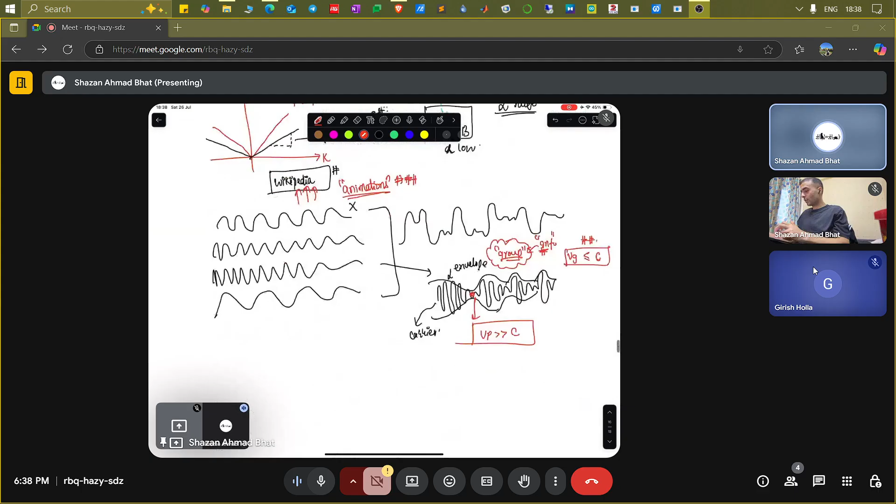So the answer to this question is: the imaginary part determines the absorption, that's what we talked about. The real part determines the phase velocity - that's correct. The real part determines the group velocity, the propagating velocity of the electromagnetic wave. The refractive index is complex, that's absolutely correct. The real part determines group velocity, that's also correct, and this is the velocity with which the wave actually propagates. So this is the dissection of the first question.

Moving on to question two. These are just cakewalk questions, you can easily solve them in your sleep even. You are given a momentum - you have to find the momentum of an electron and the momentum of a photon, and compare the two. Let's say you are given a 2 electron volt electron - this is the energy of the electron in electron volts - and you have to say, is the momentum greater, less, or equal to the momentum of a photon of the same energy?

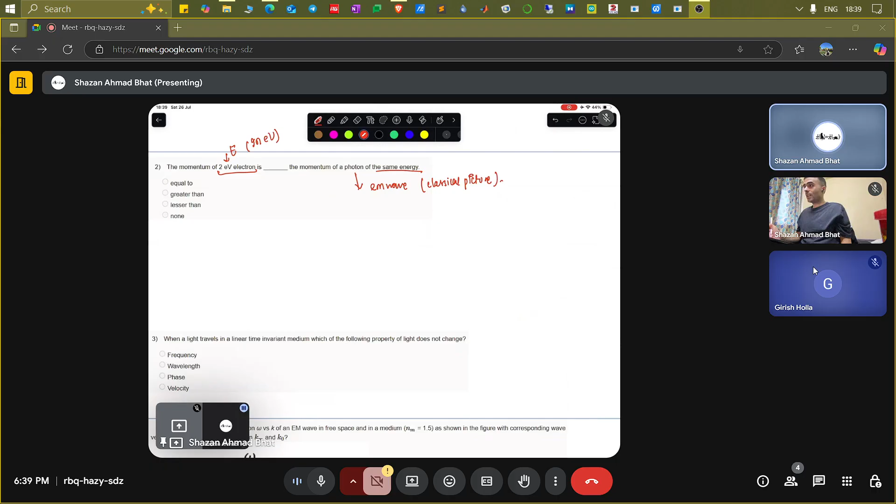For the photon, because it's an electromagnetic wave, till now it's like a classical picture. How do you compute the momentum? You compute it just in terms of the wavelength. How do you know the wavelength? You can compute it by hc over energy. You know the energy, which is 2 electron volts. You put it in, you get the momentum of the photon.

Now for the momentum of the electron, it can be computed as the square root of twice m into the energy of the electron, simple as that. You put in the values of energy, the mass of the electron 9.1 times 10 to the power minus 31 kg, and the energy of the electron - you can keep it in electron volts or convert to joules. When you do it, you get that the electron's momentum is much greater than the momentum of the photon of the same energy.

And this momentum is very small, of the order of 10 to the power minus 27, the units of momentum. What are the units of momentum? P is m times v, so this is kilogram meter per second. Yeah, so you'll see that the photon momentum is very small compared to the electron momentum. That is what I was initially talking about.

Because the photon is a quasi particle. It's just like a field that is propagating the information between the two actual particles.

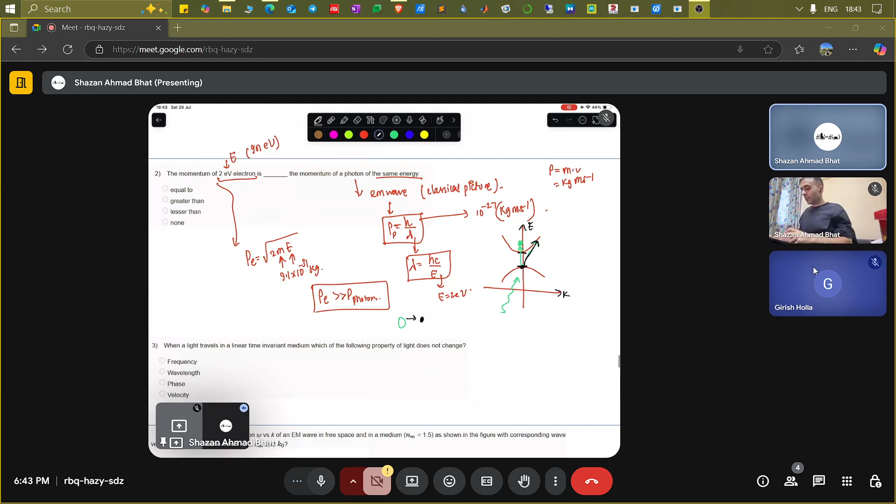So you have to just solve it using certain basic equations. Now another easy question: when light travels in a time invariant medium, what is a time invariant medium? It is a medium which does not change with time, where there is nothing time dependent changing.

Just like if you have water and air, if a wave goes in, it will refract and come back out on the other side of the water slab. If there is nothing changing with time inside the medium, then only one thing is going to change in the electromagnetic wave: the wavelength. The other things are not going to change.

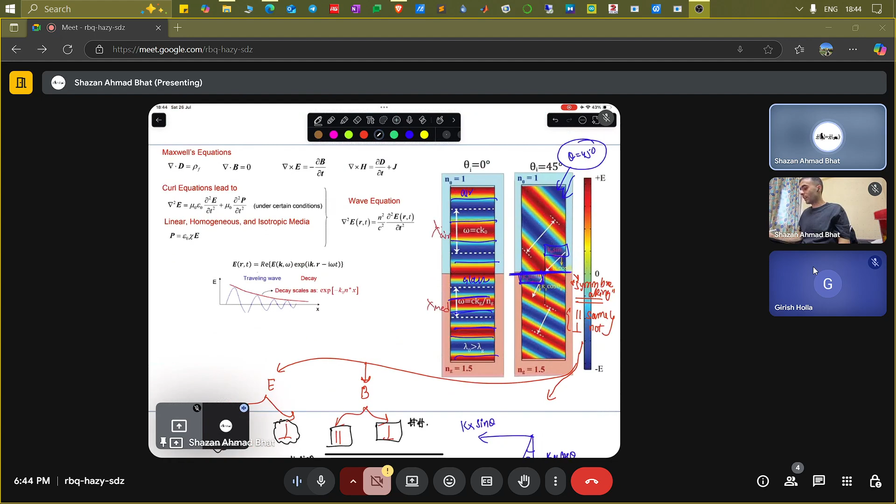That is the fundamental notion from the simulations you saw. When a plane wave hits a medium of different refractive index, its wavelength goes on changing, but the frequency doesn't change because it's dependent on the source. Wavelength is basically a spatial concept, while frequency is a temporal concept—but you can have temporal frequency as well as spatial frequency, as the professor has already talked about.

So the essential thing is that if there is nothing changing inside the system, it is an LTI system. In control systems, people mostly talk about LTI systems, linear time invariant systems. If nothing is changing with respect to time, then only the wavelength is going to change.

But if something is going inside the medium—let's say you have a water slab and you shine a beam of light through it, it comes out on the other side. Now if you don't have an LTI system, if you have a time varying system, say you put a sound source on this water slab emitting acoustic waves, those acoustic waves go into the water. Now it's no longer an LTI system because these acoustic waves are time varying, perturbing and disturbing the water. You no longer expect only the wavelength to change—sometimes you can get a different spectrum of frequencies altogether.

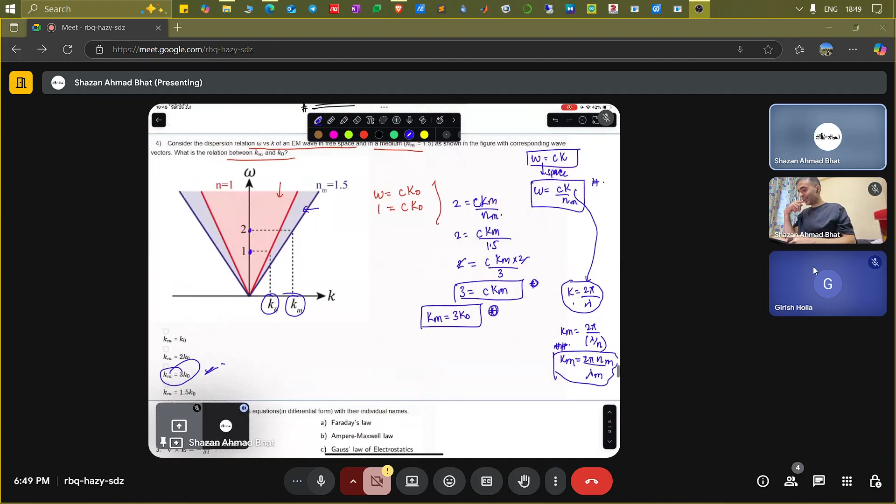Now, what is next? This we have been studying since class 12th itself. So we have to just match the following.

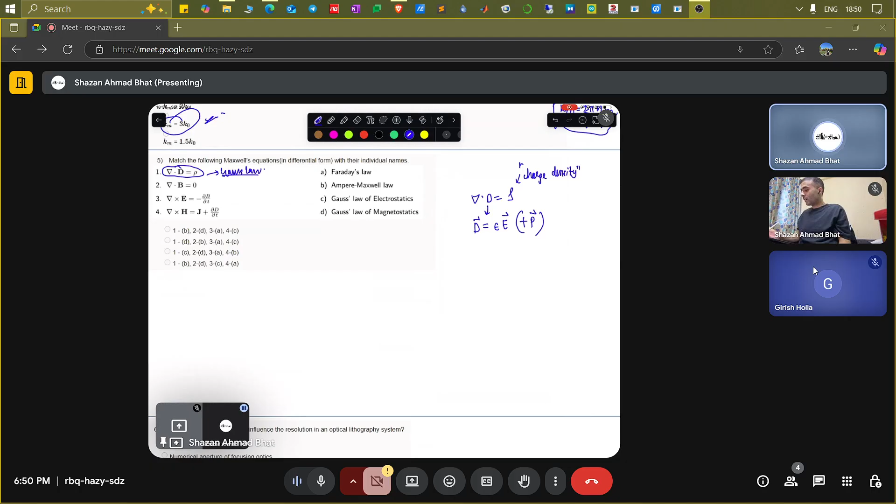This particular thing is like Gauss's law in electrostatics because del dot D is the charge density. D is the electric displacement vector, and it is basically epsilon times the electric field, if you don't consider polarization. If you write it in terms of electric field, you can write it as epsilon del dot E equals to rho, so you get del dot E equals to rho over epsilon. This is basically Gauss's law.

That same equation basically simplifies to the Poisson equation. In one dimension, you write the Poisson equation like this. This Poisson equation is a lot used in device physics, coming from a similar set of equations. So this is the Gauss's law.

This other one is the Faraday's law, and the Gauss's law of electrostatics is this one, so one goes to C - there is only one part where one goes to C, I guess that should be the answer. This one is the Gauss's law of magnetostatics, this one is the Faraday's law of electromagnetism, and this one is the Ampere's Maxwell law.

That's as simple as that. Let's move on to the other question.

Which of the following factors influence the resolution of an optical lithography system? What is this resolution? Resolution means how well an optical system, let's say a camera, is able to resolve two objects which are closer to each other.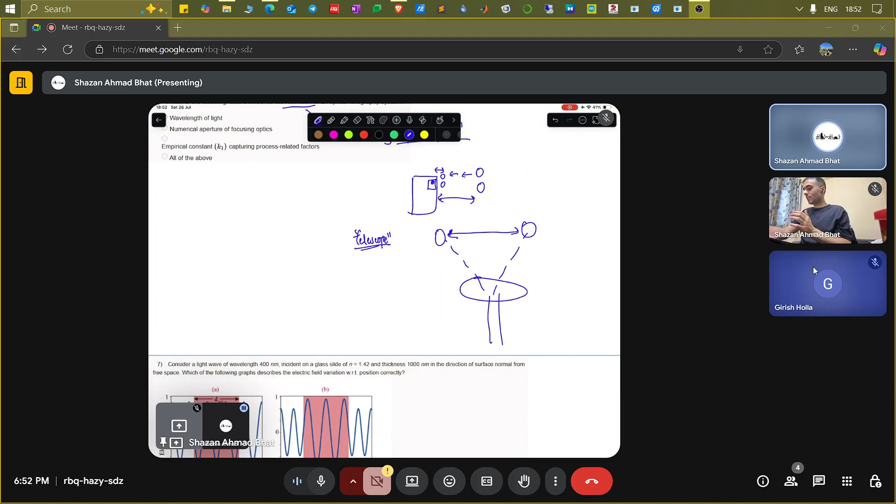Let's say for example this is a telescope, and the light is coming from these stars. The resolving power of a telescope is how well it is able to resolve that these two objects are separate and not a single object. So that is basically the resolving power of a telescope or any other optical instrument.

Even a microscope, how well it is able to resolve two nanostructures well. It mostly depends upon the wavelength you are using to view those objects. And if the wavelength goes on reducing, you can resolve smaller and smaller objects.

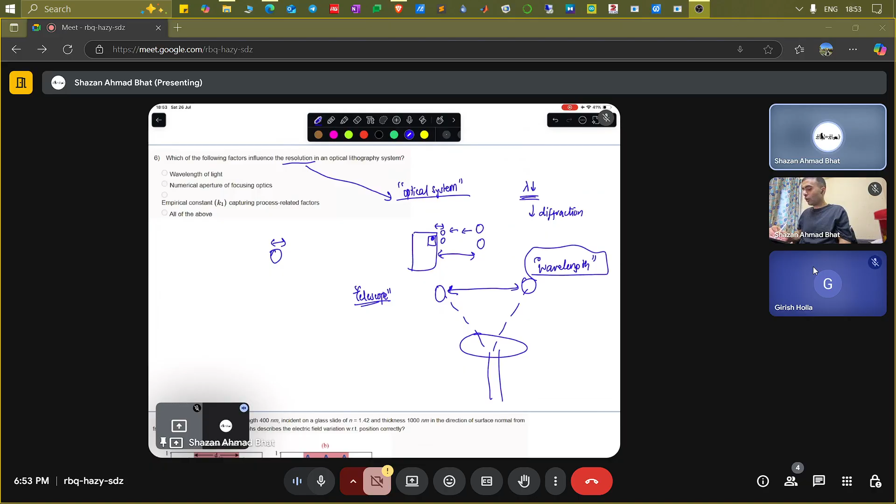It basically boils down to diffraction. So once an object size, let's say this is a ball of diameter d, if the diameter d approaches the wavelength of light, then there will be phenomena like diffraction which will happen. Light will start to diffract, and it will become difficult for our eyes to see this ball.

But let's say you have a ball of size d and you are viewing it using, let's say, 800 nanometer light, which is a red wavelength. And let's say the size of the ball here is maybe 1 micron, which is greater than the wavelength. So you can clearly see the ball with your eyes even, or with any optical instrument.

But what happens if you have another ball with the same wavelength coming in, but a smaller size ball? Now this time D is approximately 500 nanometers. What you're going to see is that D is less than lambda. You no longer will be able to see this particular ball because there will be diffraction of the waves, since the size of this object is now much smaller than the wavelength of light you are using to view it. So the light wave beams will diffract and you no longer will be able to sharply see this particular object.

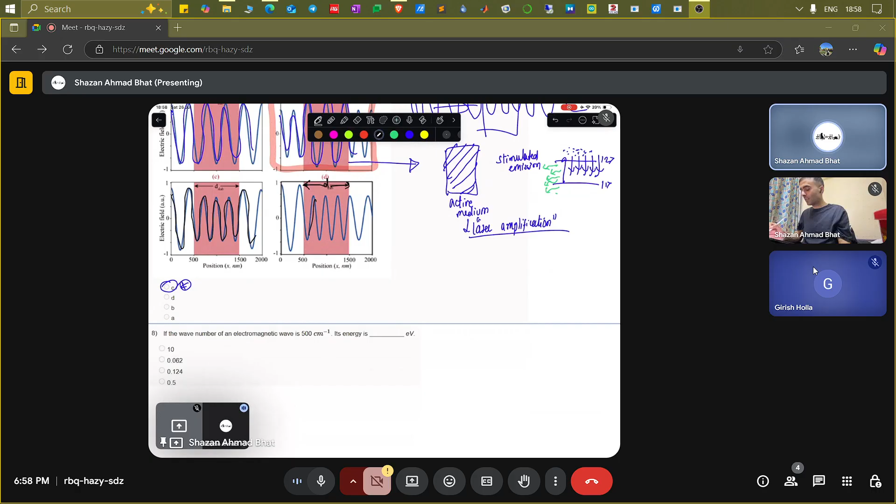Okay, now moving to question number 8. If the wave number of an electromagnetic wave is given, wave number is basically K, it is given as 500 per centimeter, we need to find the energy. It's also simple. If you know the wave number, you can compute the wavelength.

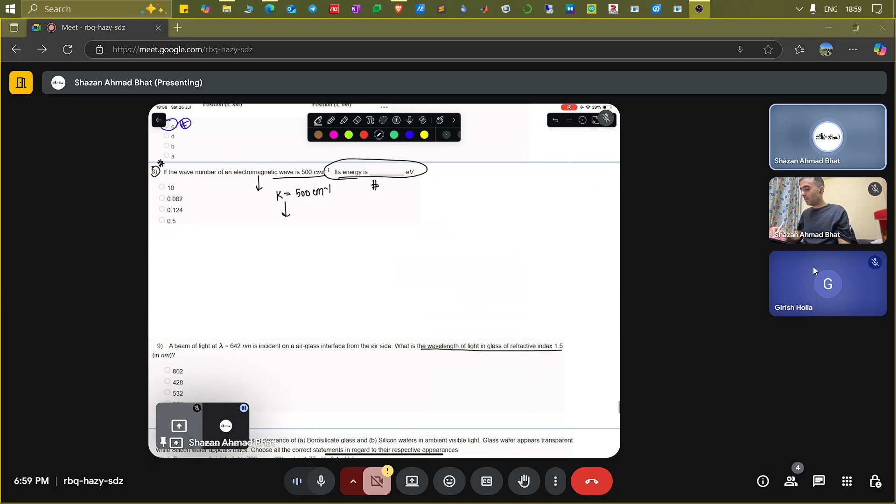Note here, it is in free space. If it was not in free space, then they would have mentioned the refractive index also. But you have to consider it here as free space and consider n equals to 1. So k is equal to 2 pi by lambda, you get lambda equals to 2 pi by k. Once you get the lambda, you can compute the energy of the electromagnetic wave in terms of electron volts. So you have E equals to hc over lambda. You know the lambda, you know the velocity of light, you can compute the energy.

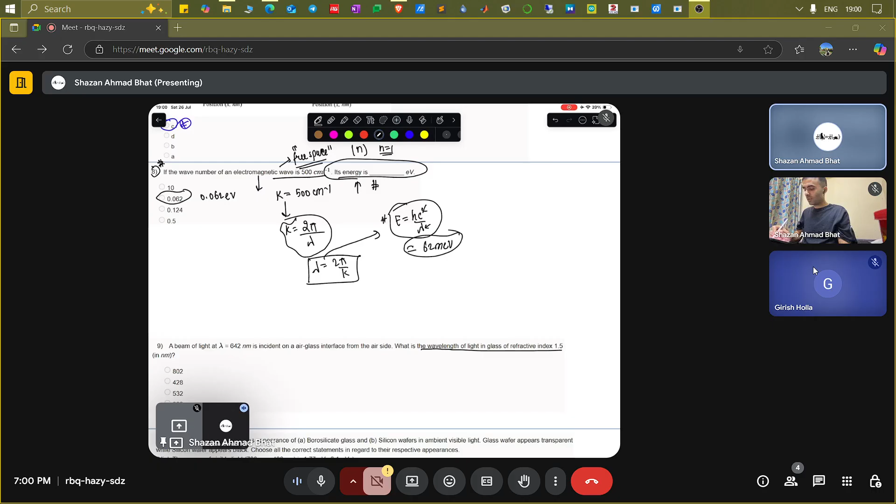You get around 62 milli electron volts, that is basically 0.062 electron volts. As simple as that. This is the easiest problem.

Now, again, a beam of light is incident on an air glass interface from the air side. What is the wavelength of light in the glass of refractive index 1.5? So you have air, you have glass, and waves coming in with a certain wavelength of 642 nanometers. What's going to happen to the wavelength inside?

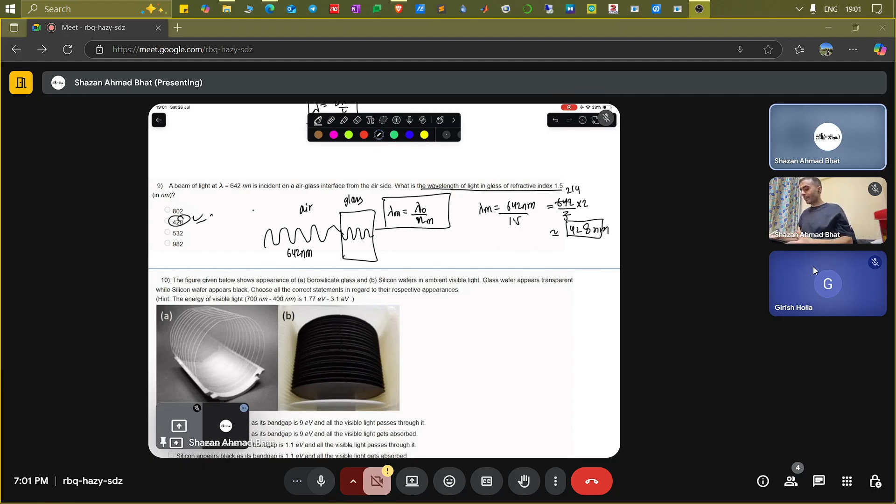Again, the simpler one. So question 10, this is related to band gaps now. For example, if you have system 1 and system 2, this band gap is large. Large compared to what? Compared to the incoming electromagnetic wave's energy, h nu. For example, this band gap is, let's say, 9 electron volts, and this band gap is, let's say, 1.1 electron volts.

If you have an incoming electromagnetic wave with photon energy of 2 electron volts, this particular electromagnetic wave which is coming with 2 electron volts will not get absorbed in it. It will just pass through. That is what basically a transparent material is.

Okay, if the energy gap, which is the electronic energy gap, is larger than the incoming photon, then the photon just passes through it. It doesn't interact with it, it doesn't get absorbed with it, it doesn't cause electron transitions.

But on the other hand, if a 2 electron volt photon comes in and hits this particular medium, it will get absorbed and it will bring the electron to the higher energy levels. That is the concept of basically absorption. So if this energy value is of the order of the band gap, then it's going to get absorbed, just like the notion of the photoelectric effect. But in case of the photoelectric effect, you had something called the work function.

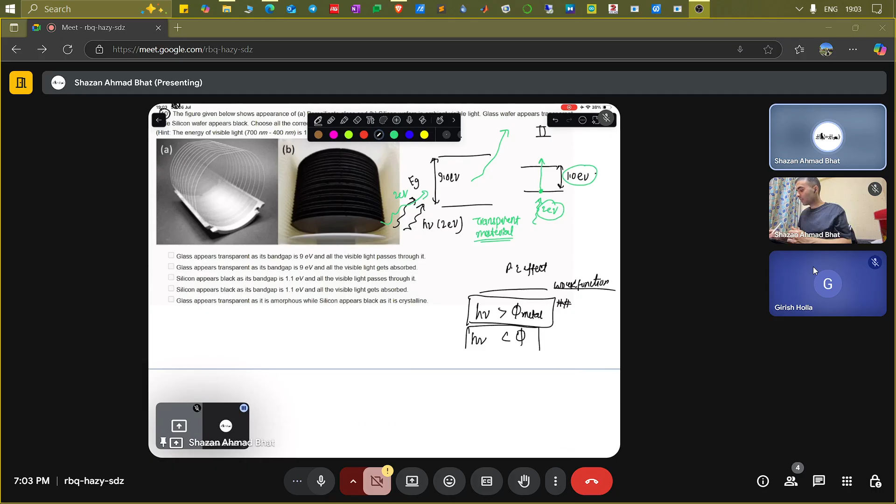So you talked about that if the energy of the photon is much greater than the work function of the metal, or any system, then at that particular point the electrons will be knocked out. That means there will be interaction, the photons will be absorbed, and the electrons will be knocked out. That is basically the photoelectric effect. But if you have energy less than the work function, those photons cannot knock out the electrons. For those photons, the medium will behave as transparent. That is the same notion.

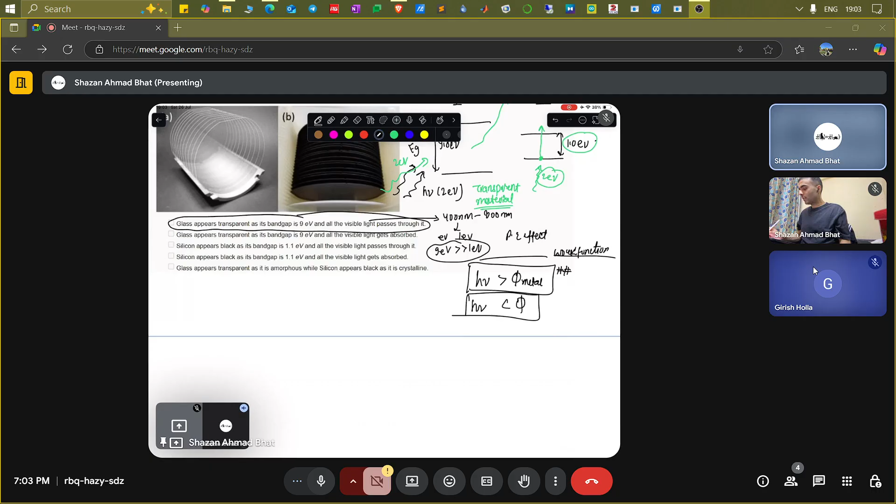So which are the correct ones here? The glass appears transparent as its band gap is 9 electron volt and all the visible light passes through it. That is absolutely correct because visible light is from 400 to 800 nanometers, and if you convert that into electron volts, it's around 1 electron volt or even less. 9 electron volt is much, much greater than 1 electron volt. As a result, whenever light comes to glass, it just goes through, because the band gap is so huge that none of the photons interact with the electron, get absorbed, or create any transitions. That is as simple as that.

And silicon appears black as its band gap is 1.1 eV, and all the visible light passes through it - no, silicon appears black because its band gap is this and the visible light gets absorbed. This is the exact answer.

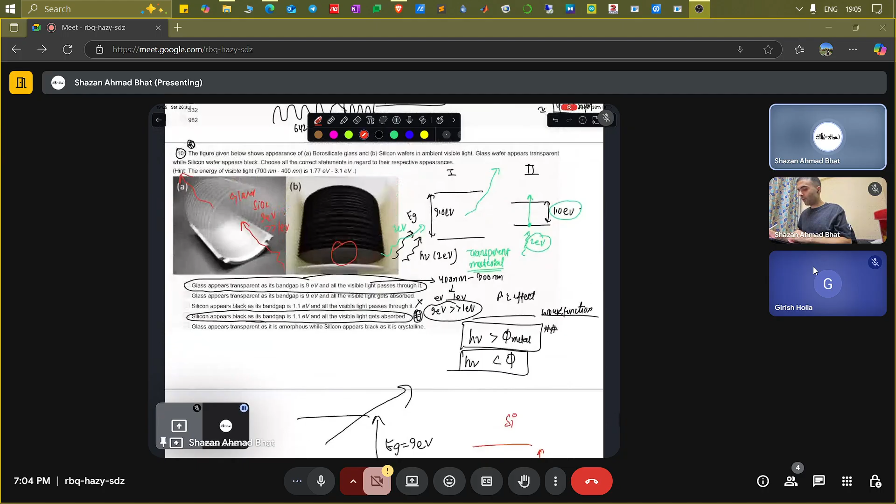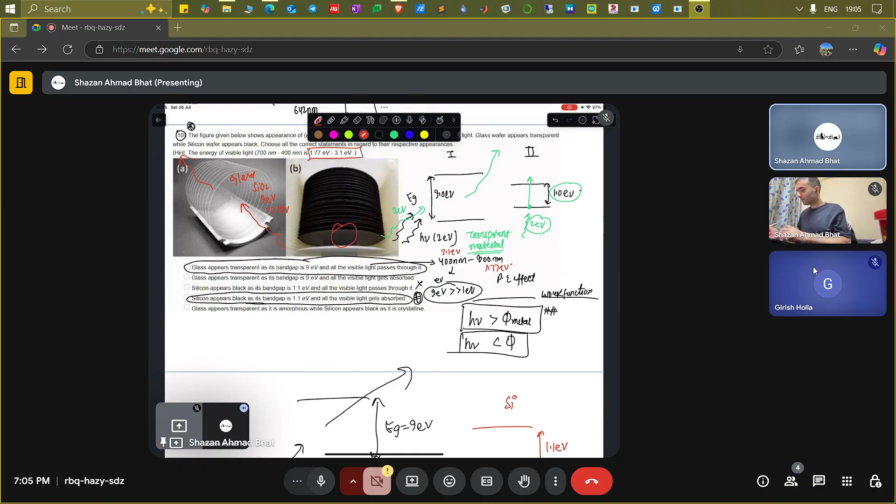You see, if you have a glass, an electromagnetic wave coming is just passed through because the band gap of glass, which is basically silicon dioxide, is 9 electron volt, much greater than 1 electron volt. But for silicon, with a band gap of 1.1 electron volt, if you have an incoming light beam of 1.77 eV, this is the range given, 1.77 to 3.1 eV. If you have a 1.77 eV photon coming in, that will get absorbed and cause an electronic transition inside the system. One photon creates the electronic transition of one electron, and we say one electron-hole pair is generated. The electron goes from the valence band to the conduction band - you have an electron in the conduction band and a hole in the valence band. I'm talking about silicon, which is a semiconductor - you might have studied this in device physics previously. So these are the two answers of this particular problem, and that is it.

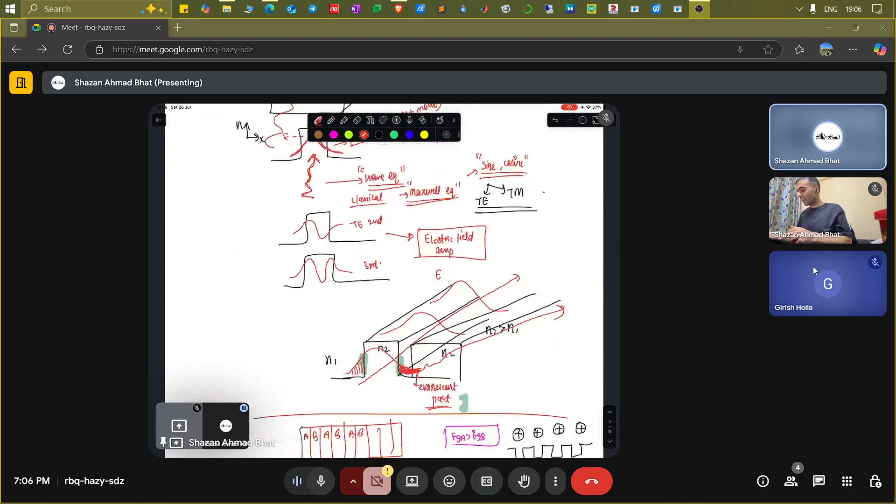We are done with today's session - some simpler problems, but mostly the main thing is about understanding where you can relate the electron's behavior and the photon's behavior in both of these systems. That is the essential part.

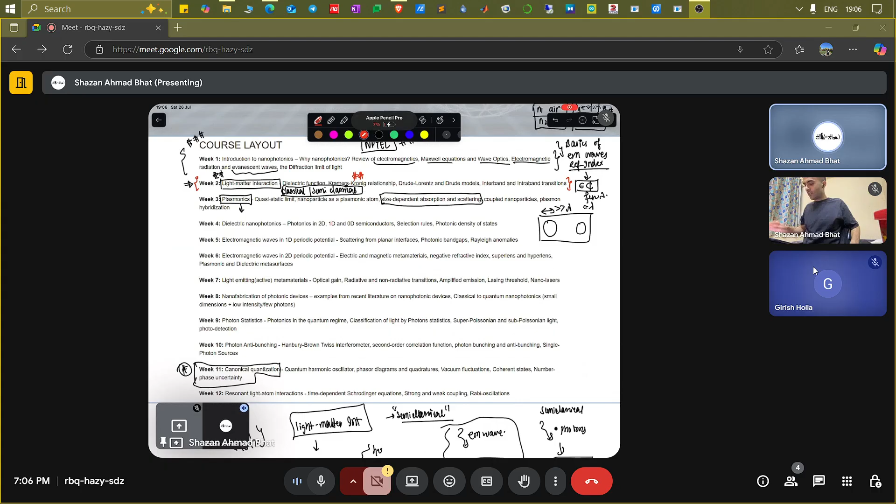In the next lecture, in the next session, we will be mostly solving questions on light matter interactions. I'll try to keep the introductory or basic part very small so we can mostly spend our time on the question answer session, although I try to solve all the questions in a well stipulated time. So we will be meeting in the next lecture on next Wednesday or next Saturday at the same time. If you have any questions, you can stay or post them anytime, or if you have any queries, you can just tell me. Otherwise, we are done with today's session.

Just a clarification regarding the assignment submission - week one and week two submission date is due on 6th of August. Why is it that both weeks are given on the same day? 6th of August is Wednesday. Which both weeks are you talking about? Week one and week two. Oh okay, I got it. So there's a next session on 2nd August, right? To be honest, I am not aware about that particular thing because I don't mostly deal with submissions or other things. You can directly text the NPTEL team, whoever might be coordinating with you, or drop a mail to the professor, or the NPTEL team will be better if you have some contact given there. They might be able to answer your query. Okay, okay, thank you.